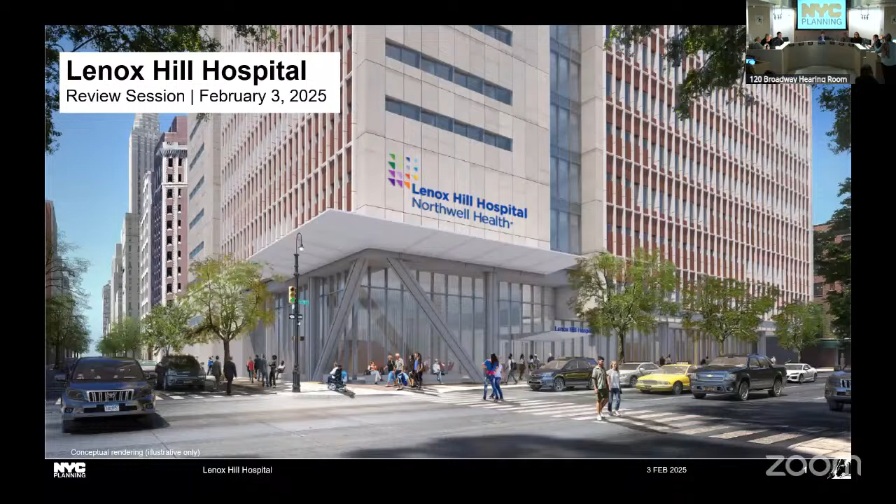This is a private application by Lenox Hill Hospital to facilitate the revitalization and enlargement of the Lenox Hill Hospital campus in its existing Upper East Side location within the full city block at 100 East 77th Street in the Lenox Hill neighborhood of Manhattan Community District 8. The applicant is requesting a number of actions, including a zoning map amendment, zoning text amendment, a special permit, and an authorization.

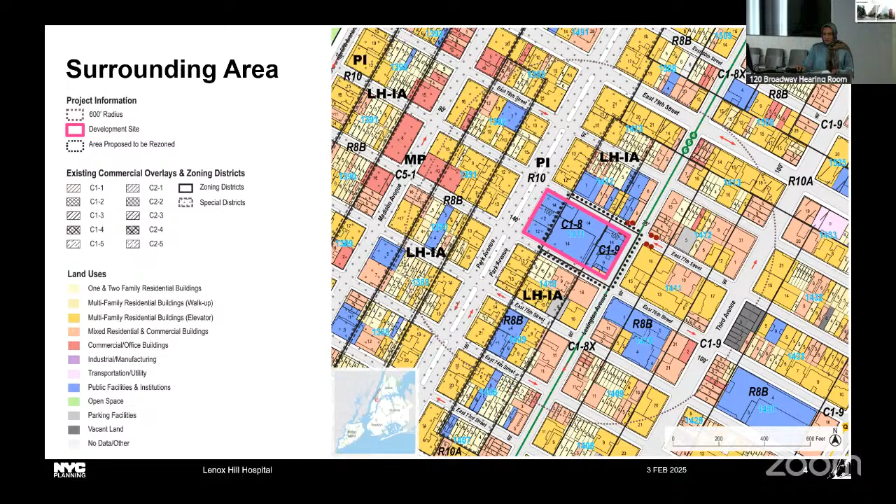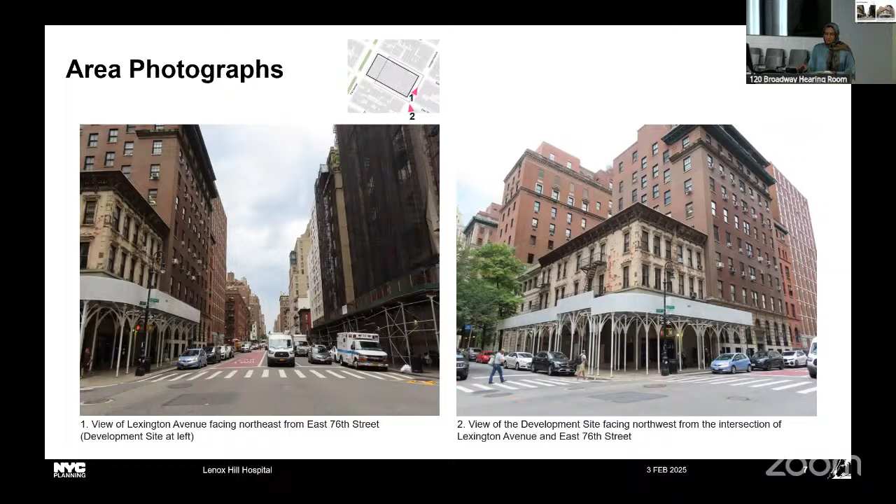The development site is an 82,700 square foot zoning lot, which encompasses the full city block. It is improved with 10 buildings used for nonprofit hospital use, which together comprise the Lenox Hill Hospital complex. The existing buildings range in height from 1 to 14 stories and were constructed between the late 1800s and early 1970s. 3 of the existing buildings were constructed pursuant to approvals by the Board of Standards and Appeals.

Together, the existing hospital contains approximately 620,500 square feet of zoning floor area, or roughly about 7.5 FAR, which is greater than the amount of floor area permitted as of right under the current zoning designations.

The existing buildings represent a variety of architectural styles and multiple eras of hospital design, and as a result, while the existing buildings have been interconnected to function as a single hospital, there are inconsistencies in elevation, and many of the buildings have long, narrow floor plates. Due to these constraints, operating suites are undersized, emergency services are limited, and most patient beds are provided in multi-bedded rooms.

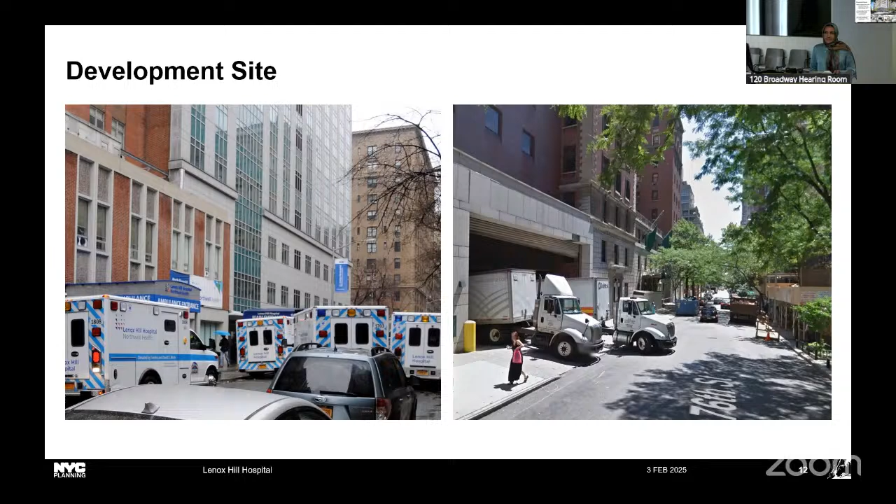To address these challenges, the applicant is proposing an enlargement and modernization of the existing Lenox Hill Hospital complex to ensure continued delivery of patient care in the hospital's Upper East Side location.

Following the renovation, Lenox Hill Hospital will provide 475 single-bedded patient rooms, state-of-the-art operating rooms, a new emergency department, and a dedicated mother-baby wing. The applicant proposes to alleviate existing streetscape impacts caused by on-street ambulance parking and inadequate loading berths by providing new on-site ambulance space and appropriately sized loading berths.

The proposed development would include improvements to accessibility at the 77th Street station, which include at-grade sidewalk expansion and additional covered open area at the intersection of Lexington Avenue and East 77th Street.

To accomplish this, the proposed development includes 2 components. On the eastern portion of the block, including the mid-block on East 76th Street, the existing buildings would be demolished to allow for construction of the new hospital building with efficient floor plates, an expanded emergency department, and industry-standard surgical suites and patient rooms. On the western portion of the block, the existing buildings would be renovated to seamlessly connect with the new building and meet modern hospital standards, including single-bedded patient rooms.

By retaining these buildings, exterior construction within the western portion of the block would be minimized, and the hospital would be able to provide uninterrupted care throughout the duration of construction.

The total floor area within the proposed development, comprising the new hospital building and renovated existing buildings, would be over 1,034,000 square feet, or 12.5 FAR. The proposed use is non-profit hospital with up to 2,500 square feet of ground floor retail for a pharmacy.

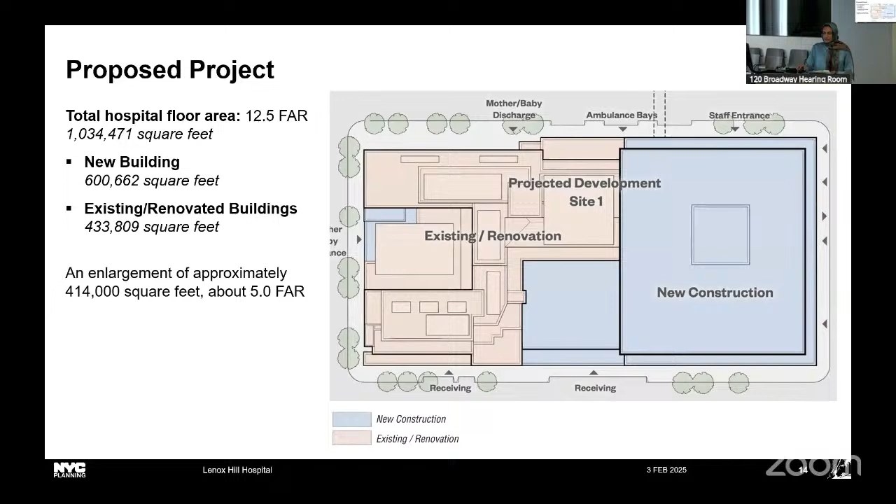Let's now take a look at the ground floor plan to better understand how the proposed development sits within the block.

On Park Avenue, a new entrance to the hospital's mother-baby wing would be provided, along with the introduction of transparency on this frontage. In addition to the mother-baby wing, the renovated buildings on the western portion would contain hospital support spaces, upgraded patient rooms, and a new fire stair.

On East 77th Street, the new hospital building would include a dedicated staff entrance west of the subway station, and further west, an approximately 148-foot wide bay that would provide a covered off-street area for up to 6 ambulances. The ambulance bay would be accessible via 3 30-foot wide curb cuts on this street.

The proposed ambulance bay would address the current concern of ambulances parking on the street. The ambulances would be able to fully pull into the bay to ensure patient loading and unloading occurred within the weather-protected hospital building.

On East 76th Street, the existing loading berths on the existing buildings are proposed to remain. In addition, a new loading area will be provided within the new hospital building with 4 berth sides to accommodate trucks fully within the hospital. This would address the current condition of larger delivery trucks impeding pedestrian and vehicular circulation on the street.

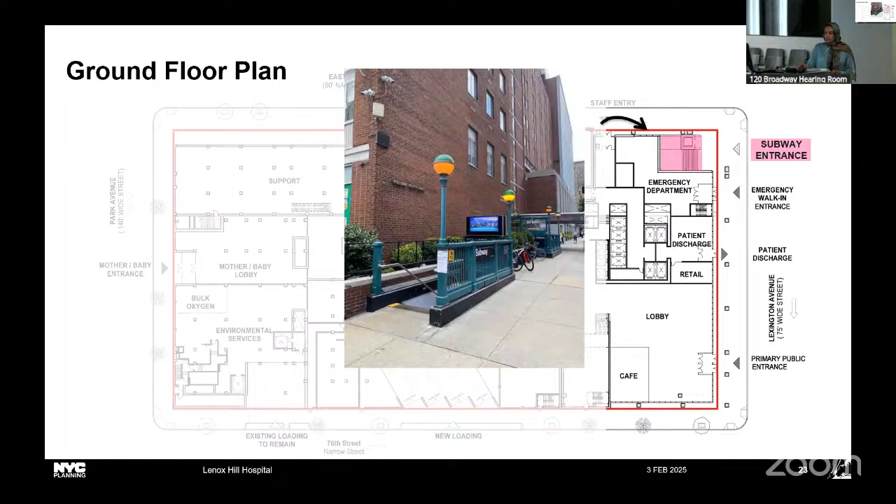This is an illustrative rendering of the proposed subway entrance. The new stair will be protected from the elements by overhanging portions of the new hospital building and include improved lighting and security systems.

This is an illustrated rendering of the ground floor along Lexington Avenue, showing the public entrance and lobby, the emergency department entrance, and the subway entrance.

Above the ground floor, the new hospital building would include a podium portion rising to a height of approximately 195 feet at the street lines of Lexington Avenue, which would include the expanded emergency department, 30 industry standard operating rooms, single-bedded patient rooms, and support spaces.

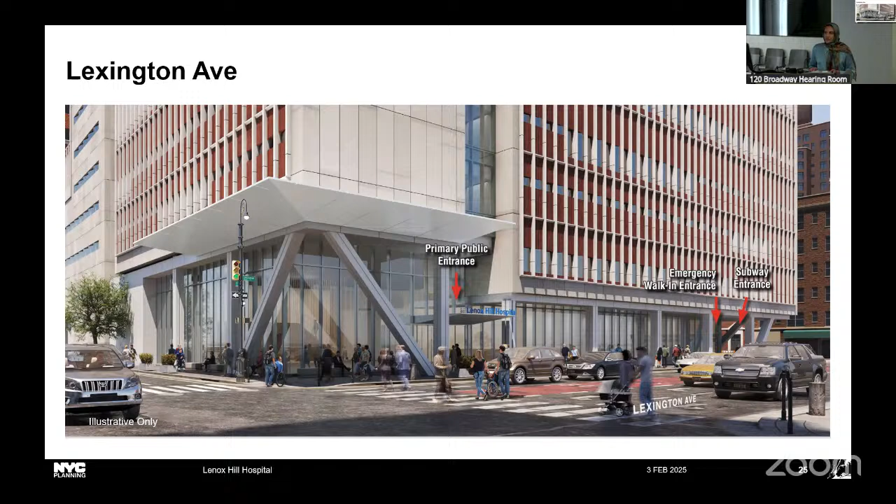Above the podium, two building envelopes are proposed in this application, identified as Envelope 1 and Envelope 2. The purpose of the two envelopes is to incorporate maximum flexibility for building design while providing two options for public review that could fit the required hospital program.

Under Envelope 1, the base of the new building along Lexington Avenue could rise to a height of 195 feet before setting back 10 feet and rising to a maximum height of 436 feet, inclusive of screened mechanical bulkheads. This portion of the new hospital building would contain 8 floors of patient rooms and several mechanical floors, while allowing for an efficient configuration of patient rooms with natural light provided along all sides of the building.

Under Envelope 1, the portion of the new hospital building at the mid-block could rise to a height of up to 210 feet, consistent with the highest floors currently existing in the mid-block portion of the development site.

Under Envelope 2, the height of the new hospital building would be lower than Envelope 1 by 41 feet along the Lexington Avenue frontage. To accommodate the hospital's programmatic needs with a reduced overall height, Envelope 2 moves some of that floor area to the mid-block instead. The envelope height along Lexington Avenue would be up to 395 feet, inclusive of mechanical bulkheads.

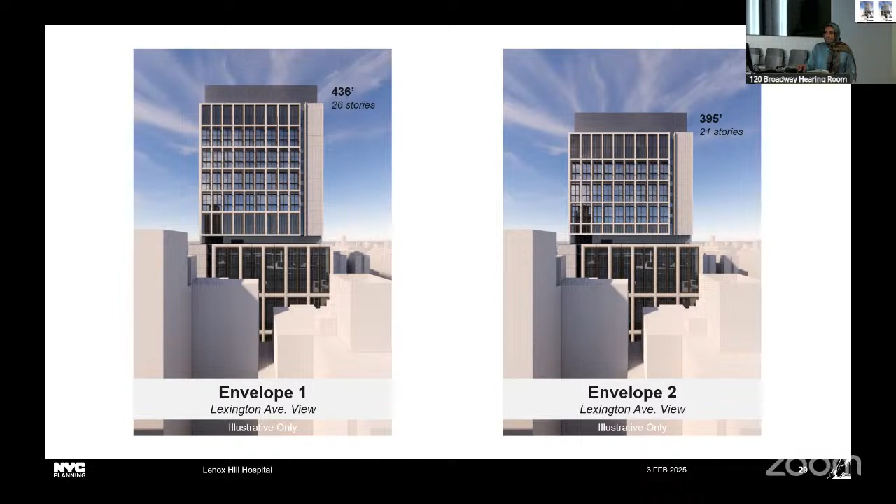This is a diagram of the neighborhood character along Lexington Avenue, with the two envelopes showing the new hospital building in dark gray.

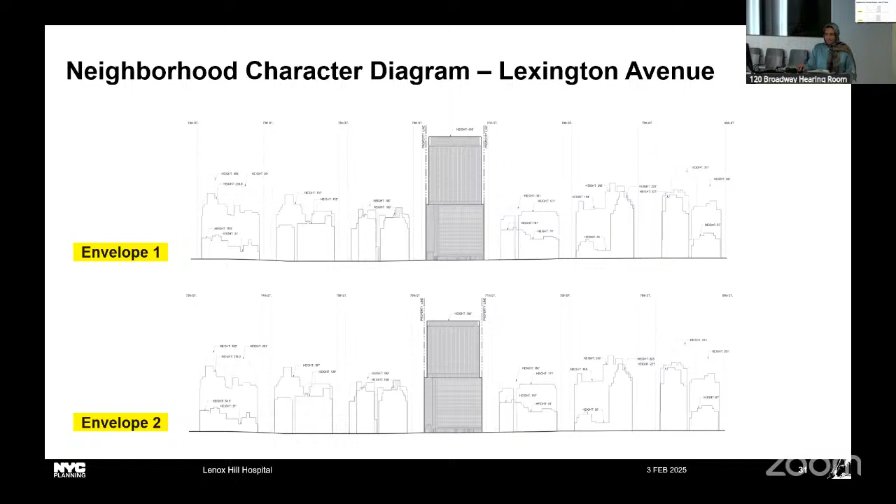The applicant is requesting a number of actions to facilitate this development. I will go into detail on each of these actions in the following slides.

The first action is a zoning map amendment to rezone the mid-block from R8B to C1-8, which is an R9 equivalent, and the portion of the mid-block within 100 feet of Lexington Avenue from C1-8X to C1-9, which is an R10 equivalent. The rezoning would allow up to 10 FAR community facility use across the entire zoning lot.

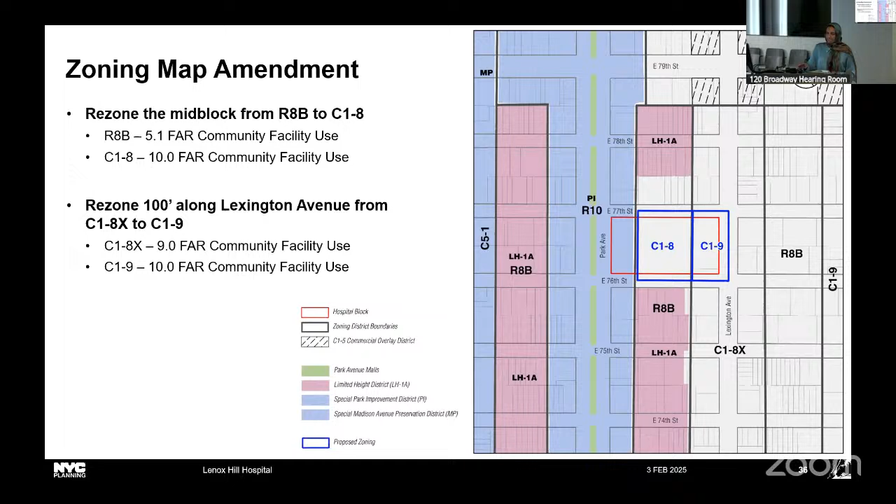The second requested action is a zoning text amendment. The first amendment is to Article 7, Chapter 4, to create a new hospital special permit that would allow up to a 20% increase in floor area for nonprofit hospitals within a full block located in an R10 or R9 equivalent commercial districts, partially within the Special Park Improvement District.

The second amendment is to ZR Section 66-513 to allow the new hospital special permit to be used in conjunction with a transit improvement bonus. The third amendment would be to ZR Section 92-21 to allow the permitted FAR on a zoning lot partially within the Special Park Improvement District for which a hospital special permit is being granted to exceed 10 FAR, provided that the amount of floor area within the Special Park Improvement District does not exceed 10 FAR.

And lastly, an amendment to ZR Appendix F would map MIH options 1 and 2 over the rezoning area.

The applicant is requesting the newly proposed hospital special permit pursuant to ZR Section 74-904 to allow a 20% floor area bonus to increase the allowed FAR on the site to 12 FAR. The special permit would also allow the project to incorporate any transit bonus separately requested through an authorization. It would establish the maximum zoning envelope and allow height and bulk modifications.

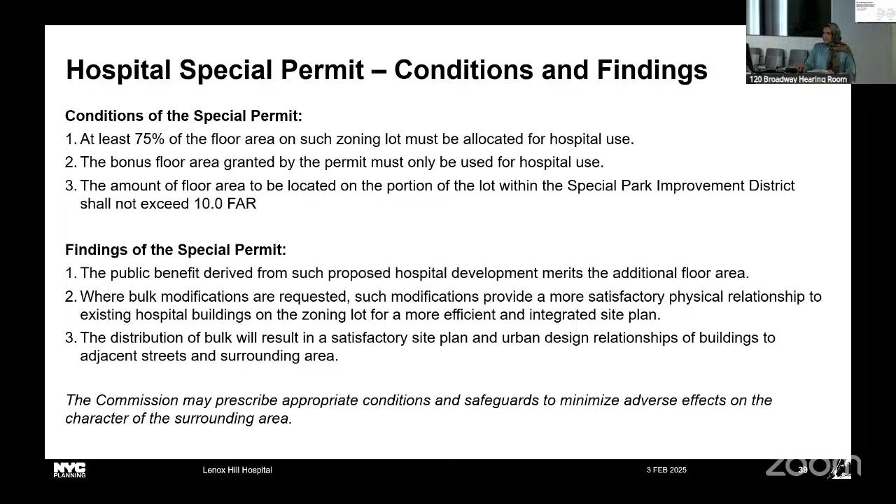As part of the requested hospital special permit, the applicant is requesting bulk modifications within the two proposed zoning envelopes. There are two types of waivers being requested: ones that enable the new building along Lexington Avenue and ones that enable the existing buildings to remain. The requested waivers to facilitate the new building on Lexington Avenue and portions of the existing buildings on the mid-block include maximum front wall height, minimum required setback, and sky exposure plane.

The requested waiver for front wall height would allow the podium height along Lexington Avenue and portions of the side streets to rise to 195 feet where 85 feet is required. The blue areas on the diagrams on this slide show the parts of the proposed buildings that exceed the maximum front wall height in the two proposed envelopes.

The requested waiver for setback would allow setbacks between 9.4 feet to 10 feet along Lexington, where 15 feet is required, and portions of the side streets where 20 feet is required. The requested waiver for sky exposure plane would enable a maximum building height of 436 feet under envelope 1 and 395 feet under envelope 2. Again, the blue areas on these diagrams show the parts of the building that exceed the height and setback regulations in the two proposed envelopes.

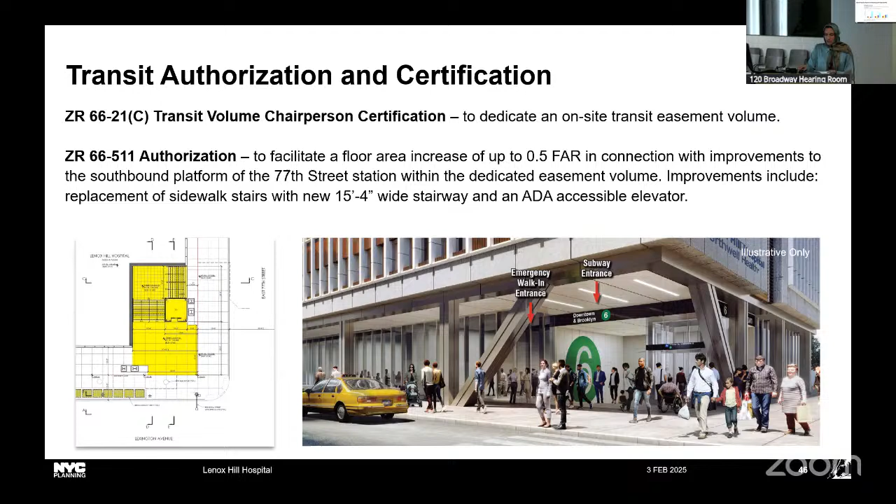This application requires a racial equity report, which helps put the proposal into context with neighborhood level socioeconomic data. There is no housing proposed as part of this application.

The Displacement Risk Index estimates comparative levels of residential displacement risk for New York City's neighborhoods. The index ranks neighborhoods from lowest to highest risk based on recent population characteristics, housing conditions, and market pressures. On this index, Lenox Hill Roosevelt Island falls in the lowest displacement risk index category.

The population of the Upper East Side is 74% white non-Hispanic, 11% Asian, 8% Hispanic Latino, and 3% Black non-Hispanic. From 2010 to 2020, the area saw a 6% increase in population, with an increase in both the Asian and Hispanic populations, a decrease in the Black population, and a small decrease in the white population.

Notice of completion of a draft environmental impact statement, or DEIS, was issued on January 31st, 2025. The DEIS identified significant adverse impacts with respect to shadows and construction noise. Mitigation measures were identified in the DEIS and will be further explored in the FEIS.

In summary, the applicant is seeking a number of actions to facilitate the expansion and renovation of Lenox Hill Hospital with an updated emergency department, single-bedded patient rooms, and industry-standard operating suites. The proposal would also alleviate existing streetscape impacts caused by on-street ambulance parking and inadequate loading berths serving the current hospital. The requested actions will allow for demolition of significant portions of the existing outdated buildings on the eastern portion of the development site, which will be replaced with a new hospital building fronting on Lexington Avenue, as well as the renovation and reconfiguration of the existing buildings on the western portion of the block to support ongoing hospital operations. The proposed development would also include improvements to accessibility at the 77th Street station.

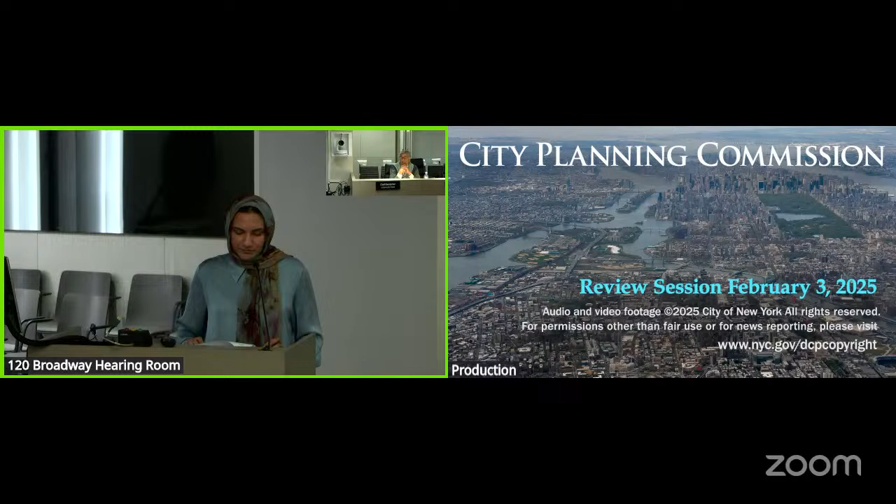Okay. If you would let them know that I'd like to know more about what is the guarantee that these things actually get done, and that they get done timely.

There's also an agreement they have to sign as part of granting the special permit that plays with the MTA, and there's a restrictive declaration that controls a lot of these different aspects. I'd be interested in what that restrictive declaration looks like. If we have it now, I'd love a copy, and I'd like to know whether it's just between the applicant and the MTA, or the applicant and City Planning. Is it our restrictive declaration? I can get more details and try to do that.

Okay, thank you. Thanks, Commissioner. Commissioner Mann? Thanks, Chair. I just want to go back to the ground floor plan, if we could, just to spend a little more time on the traffic and circulation questions the Chair was raising. Sure, do you mind pulling that up?

Can we get the presentation up? It's much more interesting to look at than me. Yeah, so if we can just maybe flip back to the ground floor.

Great. Just to understand how the proposal impacts traffic and pedestrian circulation, given the ambulance bays and new loading dock, do you know if the applicant studied a below-grade solution that was in and out, meaning in one street, out the other, rather than a turnaround scheme for the loading and ambulance bays? We're exploring different options for the ambulance itself and trying to see if there's a way to have the ambulances pull in and pull out, whether it's from the same street or the other street.

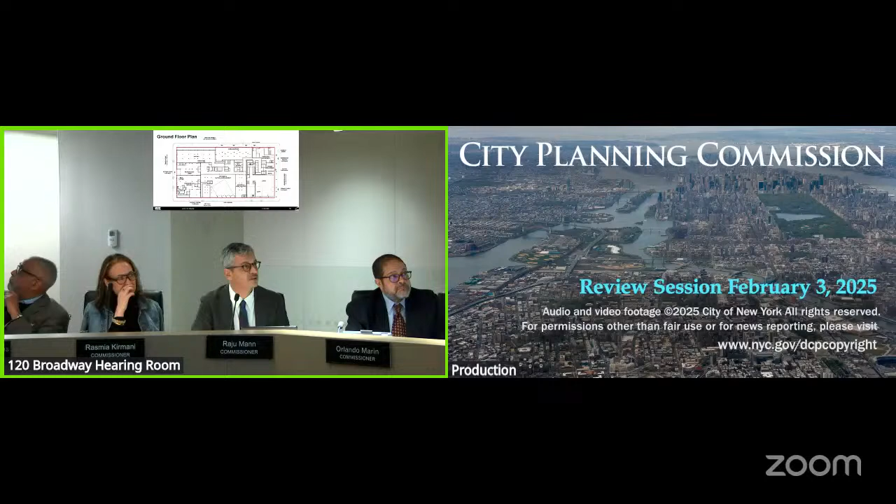Okay, it's probably in the plans, but do you know what that dimension is? Just the dimension between the column line there and the red line? I don't have the exact dimension, but I can get that to you. It seems like it's a bit of a missed opportunity not to pull the whole building back and create a more generous sidewalk along Lexington, but I can see why their site plan is constrained.

Okay, and then just on the urban design questions, which seem pretty central to this whole conversation of building height and scale and where the density goes and how much density is appropriate—do you all have a simple section across Lexington, or reference points to help us think through, not just here in the East 70s, but along the East Side?

And apologies, I was late, so I missed this.

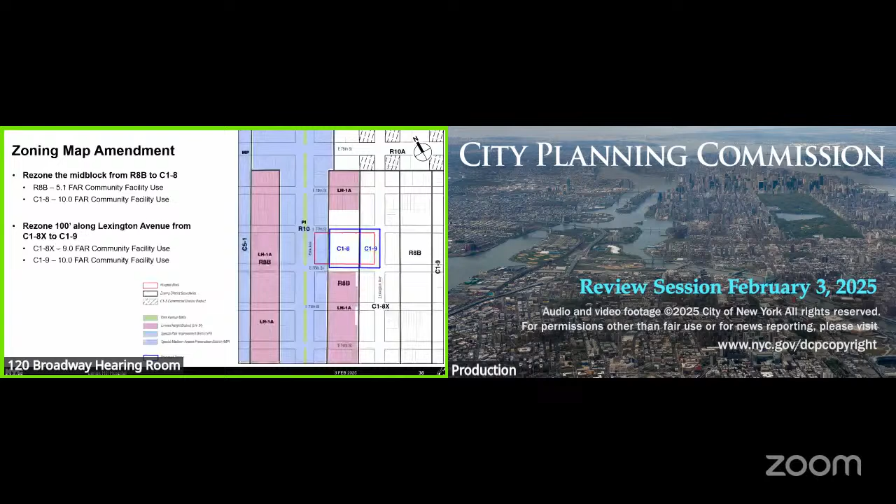I'm just curious if the department is thinking about any particular reference points for thinking about the bulk along Lexington in terms of similar buildings. Well, we have the neighborhood character analysis that outlines sections across from the side streets as well as the avenues, to help you contextualize what the proposed development would look like within this area.

So maybe the simple question, which I can probably look up, is how far south do you have to go to get to this level of bulk on Lexington Avenue? Meaning, what's the nearest reference point for a building with a street wall this height and a building at 400 feet? I can get that information for you. And I can probably look that up too.

Okay, so that's the loading and traffic questions, and then just the urban design questions. I think I had one other.

Oh yeah, on the hotel special permit. I want to make sure I understand the applicability of that. Is that a citywide special permit then?

It's pretty limited in terms of where it would be applicable, because it has to be for lots that have both an R9 equivalent commercial district and an R10 equivalent commercial district within the special Park Improvement District. So it's really just CB8, and within CB8, the eligible sites are very limited, this being sort of the only one currently.

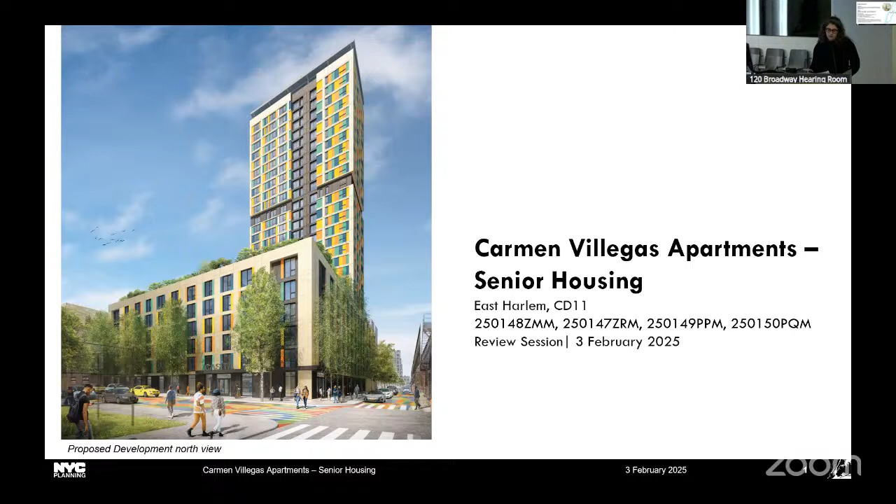This is an application by HPD and its partners for four actions: a zoning map amendment to change the existing R72, R72/C24, and R7B/C24 districts to R91 and R91/C24 districts; a zoning text amendment to modify Appendix F to designate an MIH area; an acquisition of the property by the city; and a disposition of non-residential city-owned property.

Approval of these actions would facilitate the development of a 28-story income-restricted housing building with 210 units, including 147 AIRS units, plus 1 superintendent's unit, and ground floor community facility space for seniors in East Harlem, Manhattan Community District 11.

The surrounding area is characterized by a range of low to high-rise buildings consisting mostly of multifamily walk-ups and elevator buildings, as well as a number of NYCHA campuses. Institutional uses include income-restricted housing and housing for vulnerable populations, as well as charter and public schools.

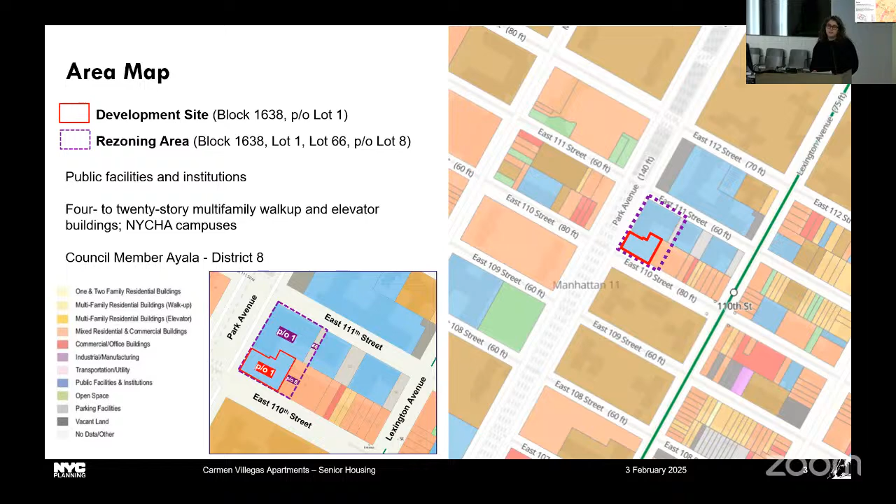The surrounding area comprises a range of high-density R districts. There's one C8-4 district just south of the project area, while C4 overlays, which permit typical neighborhood retail uses, predominate on the avenues. The surrounding area includes the Special East Harlem Corridors District and Special Park Improvement District, and is covered by the Transit, Fresh, and Coastal zones.

The rezoning area is currently zoned R72/C24, where residential FARs range from 3.44 to 5.01, and it's also zoned R7B/C24, where residential FARs range from 3 to 3.9.

The surrounding area includes many high-rise NYCHA developments, and northwest of the project area is Sendero Verde, an income-restricted HPD housing development, which was completed in 2022. A major delineating feature of the surrounding area is the Park Avenue Viaduct, which supports the Metro North rail lines.

Zooming into the proposed development site, today privately owned Lot 1 is home to Casita Park, which is a 94-unit residence for seniors. The lot was previously city-owned, and in 2000, HPD received approvals that facilitated the construction of Casita Park, plus 12 required accessory off-street parking spaces.

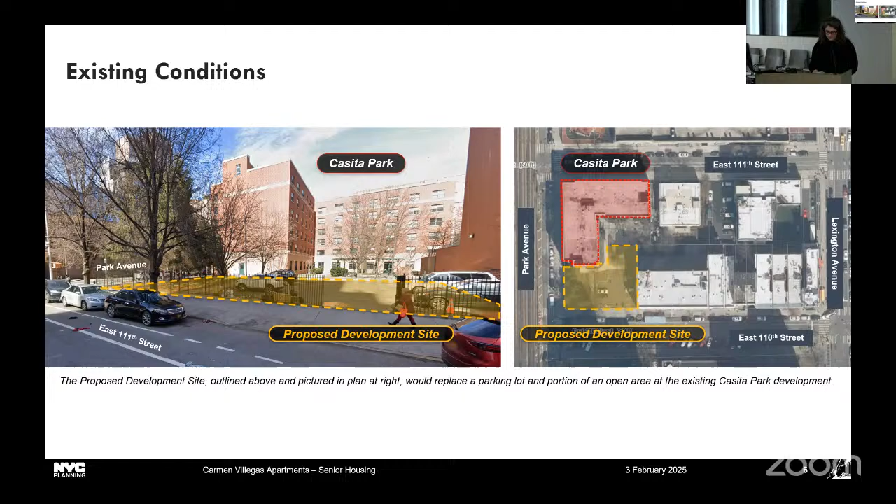Here's a view of the development site on East 110th Street facing southeast from Park Avenue, with the development site at the left. A view of the development site facing east from the intersection of Park Avenue and East 110th Street, and a view of Park Avenue and the Park Avenue Viaduct facing northeast from East 110th Street, with a corner of the development site pictured in the rightmost area of the image.

Here's another view of the sidewalk along the east side of Park Avenue, facing northeast from East 110th Street, with the development site at right. A view of the intersection of Park Avenue and East 110th Street, facing west, immediately across the street from the development site. And a view of the sidewalk along the north side of East 110th Street, facing southeast from Park Avenue, with the development site at the left.

Circling around the block to East 111th Street, there are three views of Casita Park pictured here, and only the tower of the proposed development would be viewable from this vantage point.

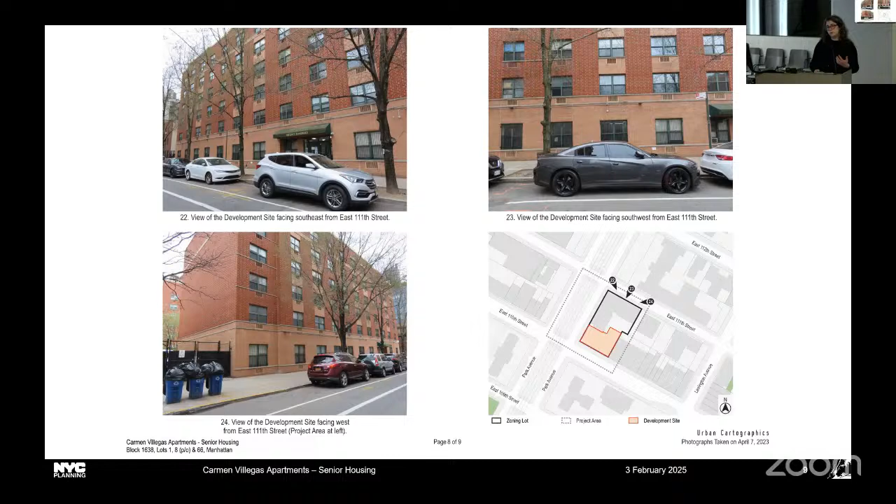The proposed development would rise to a height of 291 feet and span 28 stories, comprised of 139,000 zoning square feet, and include 63 MIH income-restricted units and 147 income-restricted units developed under the AIRS program. The building itself would have an FAR of 5.42.

The overall FAR for zoning lot 1, including Casita Park and the proposed development, would be 8.22. Finally, there is proposed to be 7,000 square feet of community facility space, proposed to be rented to SAGE, which is an advocacy organization for LGBT seniors.

Two outdoor amenity spaces in the proposed development include a 6th floor terrace and ground floor open areas. The ground floor facing south on East 110th Street provides entrances for the residential and community facility uses, and adjacent to the building's residential lobby to the east, the proposed development includes open space consisting of an arcade, which would be named Salsa Way, that connects to an open interior courtyard. This space would be open to building residents of both the proposed development and of Casita Park.

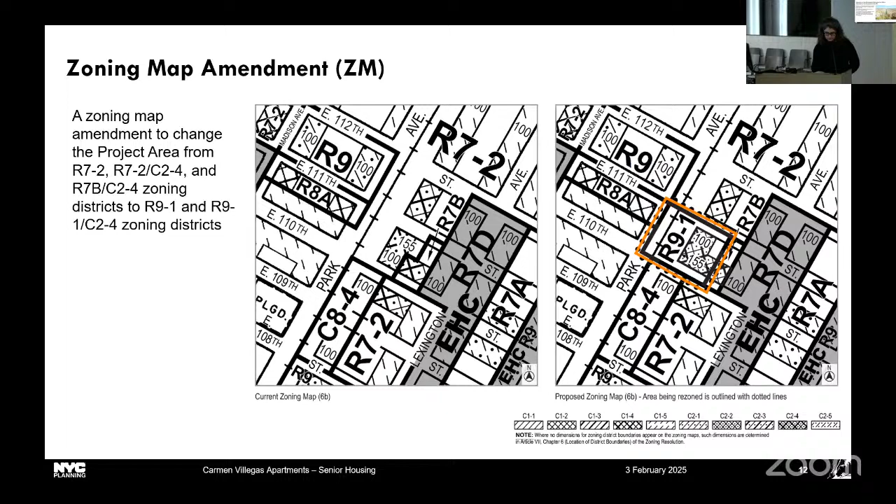This application requires a racial equity report, which includes the following findings. As of 2021, half of the neighborhood households in East Harlem earn less than $36,000 a year, a median income that is significantly lower than Manhattan and citywide median incomes.

In this proposed development, there will be a mix of studios and 1-bedrooms up to 60% AMI. However, the applicant has conveyed that these details aren't final and will speak more about them during the ULURP process. Overall, as you can see on the map, the neighborhood is at a higher displacement risk.

As of 2020, almost half of East Harlem residents identify as Latino and over a quarter identify as Black, which is in contrast to Manhattan as a whole, where almost half of residents identify as white.

From 2010 to 2020, East Harlem's population increased at a slower rate than the city's population. The number of Asian and white identifying residents increased by almost 50% and almost a third, respectively, while the number of Black and Hispanic residents decreased by 6% and 5%, respectively.

There's been a 13% jump in housing units constructed from 2010 to 2023, while population has increased by 4% in the area. This is a higher rate of housing production than the borough and the city as a whole, so the neighborhood's population is growing at a comparatively slower rate.

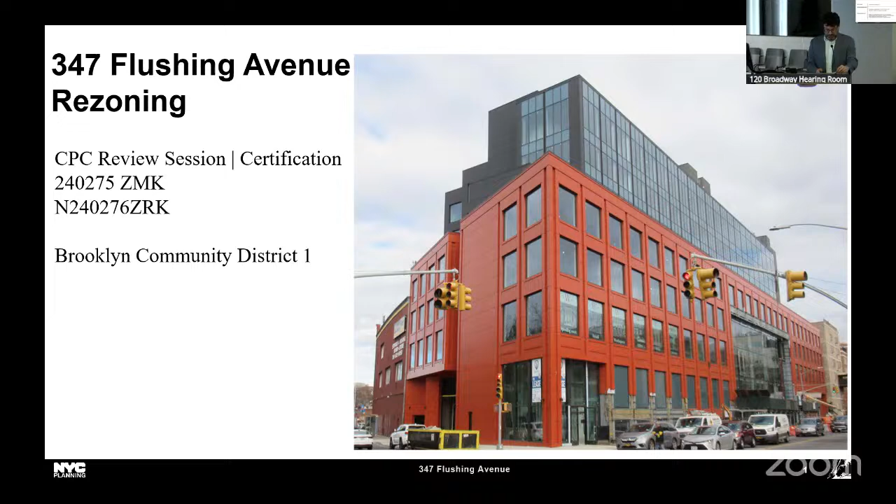This is a private application by Flushing Condo Holdings, LLC, for a zoning map amendment from M1-2 to M1-5 and R7-1/C2-4, and a zoning text amendment to map an MIH area in order to facilitate the conversion of 313 parking spaces, about 82,000 square feet of community facility space, and about 58,000 square feet of commercial space into 84 parking spaces, about 26,000 square feet of community facility space, and about 137,500 square feet of commercial space.

This conversion would take place within an existing 8-story building that was constructed in 2022. The proposed actions would also bring a legal but non-conforming 30-unit residential building at the corner of Kent Avenue and Flushing Avenue into compliance. This building was authorized in 2004 by BSA variance.

The project area is located in the southwestern portion of Williamsburg in Brooklyn Community District 1, near the boundaries of Community Districts 2 and 3 and the Brooklyn Navy Yard. The project area is bounded by Flushing Avenue, Kent Avenue, Classon Avenue, and Wallabout Street.

Here's an aerial view of the project area looking northwest. The project area sits at the border of Williamsburg, Clinton Hill, and Bedford-Stuyvesant, one block east of the Brooklyn-Queens Expressway, across which are the Brooklyn Navy Yard and Naval Cemetery landscape, a local open space. Williamsburg Bridge Plaza is about 4,000 feet north as the crow flies, and Pratt Institute is about half a mile southwest.

8 blocks east of the project area is the Flushing Avenue station on the G train, and the B48, B57, and B62 buses are all accessible within a couple blocks. The Brooklyn-Queens Expressway, an interstate highway, is the only freight truck route in Brooklyn and ultimately connects New Jersey to the Bronx, passing through Staten Island, Brooklyn, and Queens. Flushing Avenue is also a truck route connecting downtown Brooklyn with Maspeth, Queens, and the Long Island Expressway.

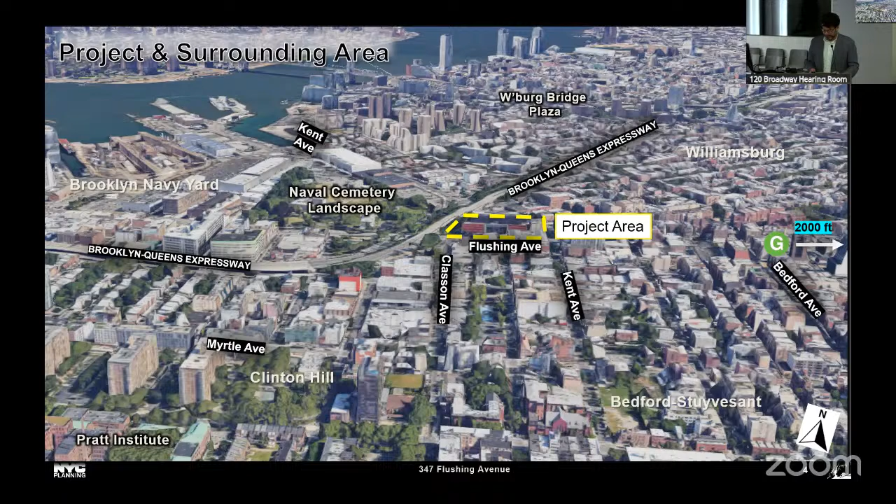Here is a view from the bird's eye perspective of the project area. You can see the BQE immediately to the west and the Naval Cemetery landscape beyond that. Beyond that is the Brooklyn Navy Yard.

Here is an axonometric view of the project area looking west. As you can see, the commercial and community facility 8-story building has already been constructed and acts as a buffer between the Brooklyn-Queens Expressway and Navy Yard to the west and various residential uses to the east. You can also see on the eastern side of the area outlined in the yellow dashed line, the project area, the existing 30-unit residential facility that was authorized by BSA variance in 2004, about 6 stories high.

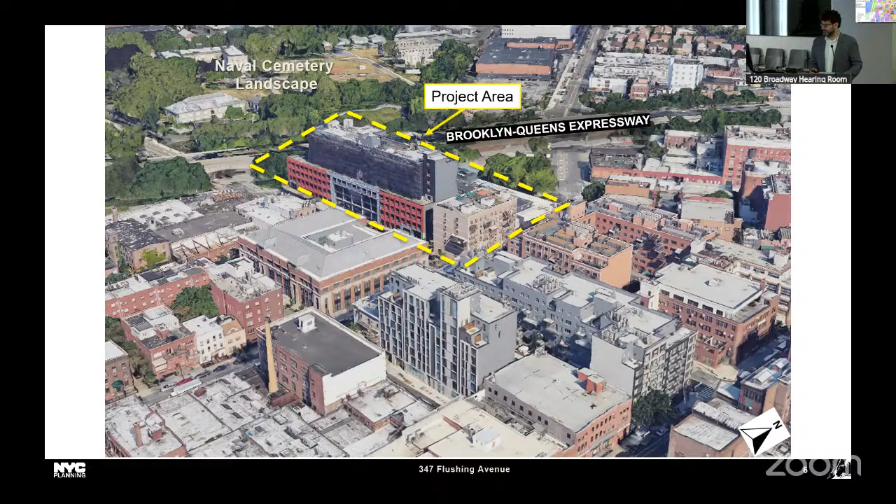The project area consists of Block 2260, Lot 35 and 7501, bordered by Wallabout Street to the north, Flushing Avenue to the south, Classon Avenue to the west, and Kent Avenue to the east.

The site is currently zoned M1-2, a manufacturing district which permits commercial, light industrial, and certain community facility uses, including retail, woodworking, repair shops, and wholesale storage facilities. The maximum permitted FAR is 2.0 for industrial and commercial uses, and 4.8 for community facility uses. Required off-street parking varies by use, but typically 1 space per 300 square feet for commercial and 1 space per 1,000 square feet for industrial.

Land uses in the surrounding area consist of a mix of light industrial, residential, mixed commercial and residential, and community facility uses. Much of the existing multifamily housing in the area is located within an M1-2 or other manufacturing zoning district, making it legal but non-conforming. In particular, immediately east of 347 Flushing on the same block is a 30-unit residential development authorized by BSA variance in 2004. The applicant is requesting to rezone this lot to R7-1 with a C2-4 overlay to bring it into conformance and map MIH to ensure affordability at any future residential developments on this site.

I also want to draw the Commission's attention to 2 rezonings that occurred in the vicinity of the project area.

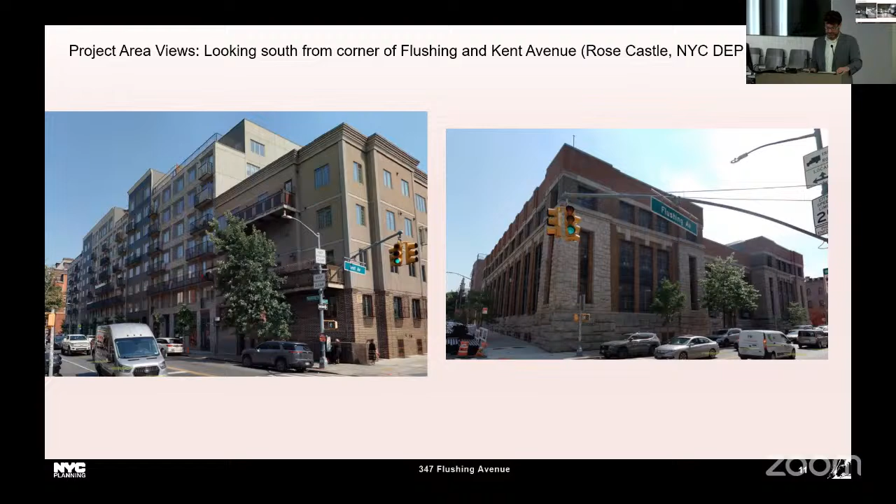I would like to draw the Commission's attention now to some discrepancies in the interior of the building that were discovered during the application process and are being addressed by DCP, the applicant team, and the Department of Buildings. According to materials filed with the Department of Buildings in 2022, when this building first opened, the current building includes 2.0 FAR of commercial uses and 2.8 FAR of community facility uses, namely the outpatient healthcare facility.

During the application process, the applicant noted this discrepancy to DCP and also noted that the rezoning being requested today, by mapping a district with up to 5.0 FAR commercial and 6.5 FAR community facility, would bring the existing building into compliance. Our office alerted the Department of Buildings to the discrepancy, and our teams are working together with the applicant team to resolve the issue and move forward.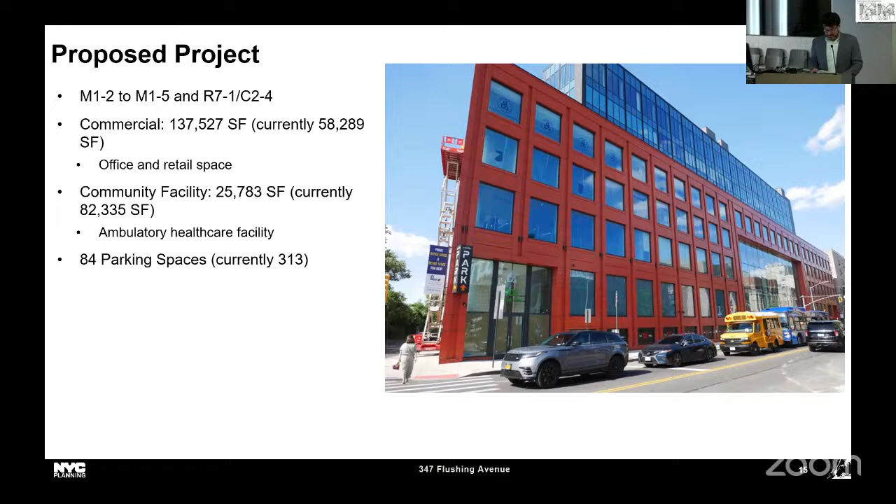To facilitate the proposed development, the applicant seeks a zoning map amendment and a zoning text amendment to map an MIH area. The M1-5 zoning district would be mapped beginning at the northeast corner of Classon Avenue and Flushing Avenue to a depth of 100 feet, and along the northern frontage of Flushing Avenue to a line 90 feet west of Kent Avenue. The R7-1/C2-4 district would be mapped from the northwest corner of Kent Avenue and Flushing Avenue to a depth of 100 feet, and then east along the remainder of the block.

M1-5 districts permit a maximum FAR of 5.0 for commercial and manufacturing uses and 6.5 for limited community facility uses, with no required off-street parking. Height is governed by a sky exposure plane.

R7-1 districts are medium-density residential districts permitting a maximum FAR of 3.44, or up to 5 with MIH on narrow streets. For buildings on a narrow street, the maximum base is 65 feet with a maximum building height of 75 feet, or in areas where MIH is mapped, a base height of 85 feet and a maximum of 105 feet. No parking would be required for buildings in the inner transit zone, which includes all of Brooklyn Community District 1.

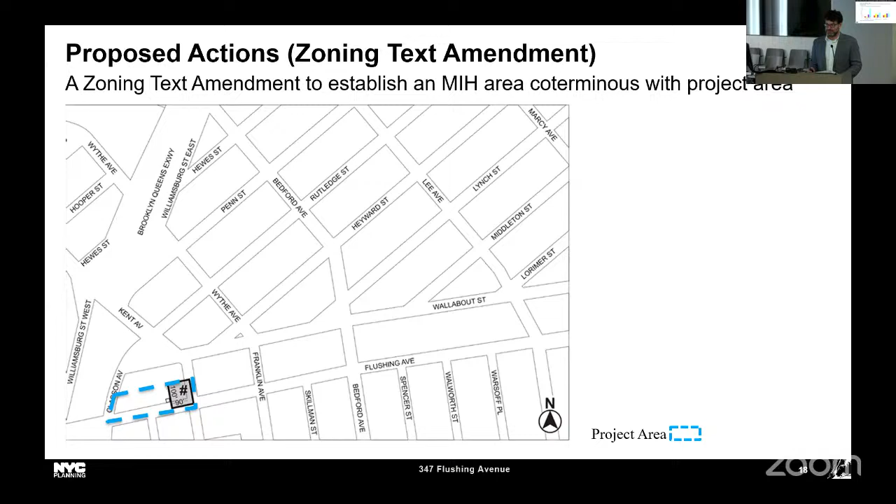This application requires a racial equity report because it is seeking a change to the use regulations in a manufacturing district where a building in the project area contains at least 100,000 square feet of floor area. The project area is located in PUMA 4001, roughly coterminous with Brooklyn Community District 1.

The overall effect of the proposed project, according to the RER, would be an increase of 120 jobs compared to today. These jobs would be concentrated in the office, retail, and medical sectors.

The part of Williamsburg where the project area is located, Neighborhood Tabulation Area 72, is noteworthy for its high displacement risk, according to the Equitable Development Data Explorer. What largely drives this conclusion is the fact that 74% of residents in this neighborhood tabulation area have an income less than 200% of the federal poverty level.

To conclude, this is a private application from Flushing Condo Holdings, LLC, for a zoning map amendment from M1-2 to M1-5 and R7-1/C2-4, and a zoning text amendment to Appendix F to map MIH, to facilitate the conversion of an existing 8-story building with commercial, community facility, and parking uses to a new floor plan with more commercial floor area and less community facility and parking space than currently exists on site.

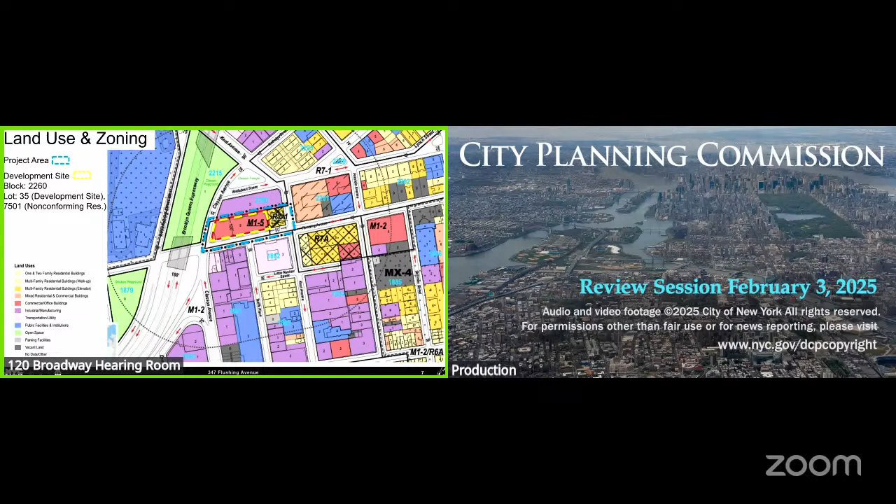So a couple of things. Thank you, that's useful. For a time we've been talking about a neighborhood-wide study that can help us understand exactly what you're talking about, like how many instances, but also what are the needs, the potential land use rationale that could support something like that. Is that something the department has made any progress on? I know there were some procurement requirements with one particular aspect of that study, but I'm very interested in understanding what is the status of that research.

Sorry, I know every time this comes up we land in the same place, but this is exactly why this would be so useful. Unfortunately, I don't have any updates on the timing of this. I feel pretty bad coming back, but as we know, we have a lot of applications in this area. As soon as we have more information on the procurement process and when we can start the study fully, we'll definitely come back and talk with you through that.

Thank you, that would be useful as we approach cases like this one. I think in this particular case the land use rationale makes sense. The only part that doesn't make sense is why it doesn't include at least some manufacturing, to respond to the district being proposed. Any additional information on this would be useful. If you can encourage the applicant to consider that, I think that would be useful. It's not unprecedented to have mixed industrial commercial that could actually work here. So I would be interested in understanding, if not, why not.

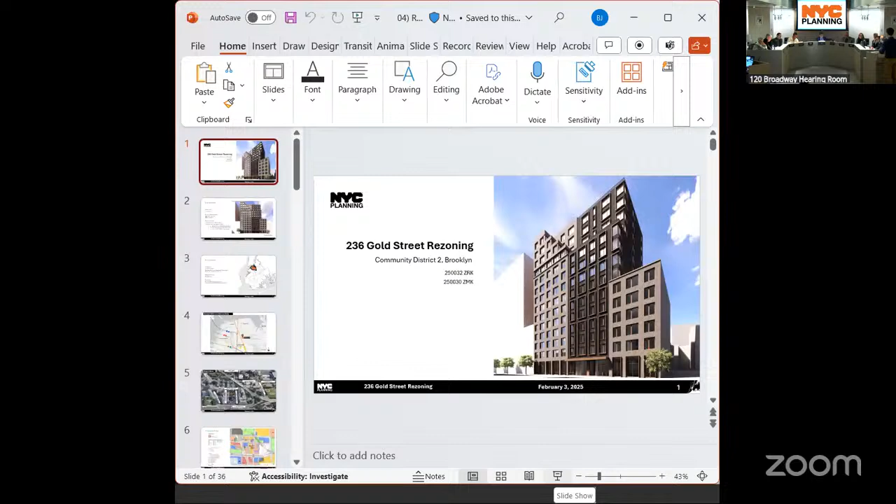Good afternoon, Chair Garodnick and Commissioners. This is a certification presentation for 236 Gold Street, a private application from 236 Gold LLC requesting a zoning map amendment from an R6B to a C6-2A district and a zoning text amendment to Appendix F to establish a mandatory inclusionary housing area with options 1 and 2. These actions would facilitate a 14-story mixed-use building with over 79,500 square feet of total floor area, with 114 dwelling units, 29 of which would be income restricted under MIH Option 1, and 2,000 square feet of ground floor commercial.

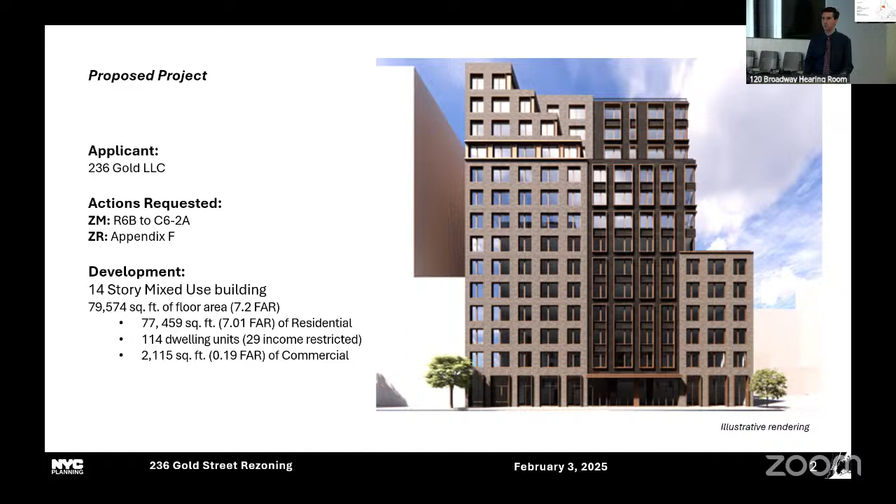This project is located at 236 Gold Street between Concord Street and Tillery Street in the Bridge Plaza neighborhood just north of downtown Brooklyn in Brooklyn Community District 2.

This project site is extremely well connected with public transportation. Within a half mile of the project area there are 5 subway stations with 10 train lines: the B, F, Q, R, A, C, 2, 3, 4, and 5 trains. By subway, the financial district is about 20 minutes away, and Midtown Manhattan is about 30 minutes away. The B57, B67, B69, and B62 bus lines also have bus stops within a 4-minute walk of the project area, connecting it to Brooklyn neighborhoods such as Gowanus and Kensington, and Queens neighborhoods such as Maspeth and Long Island City.

This is an aerial view looking north towards the project area, highlighted in orange. The project area is situated between the Brooklyn-Queens Expressway to the east, Tillery Street to the south, which is 150 feet wide, and Flatbush Avenue, 128 feet wide, to the west, which turns into the Manhattan Bridge just north of the project area. The project area fronts on Gold Street, which is 76 feet wide and consists of medium-density 12 and 13-story apartment buildings.

Concord Street to the north of the project area consists of primarily lower-density 3- and 4-story townhomes, as well as 1-story warehouses. South of the project area is the Brooklyn Commons, formerly Metrotech, with Borough Hall and downtown Brooklyn Civic Center to the west. Nearby open spaces include the 6-acre Trinity Park to the north, the Golconda Playground to the northeast, McLaughlin Park to the west, and the 10-acre Commodore Barry Park to the east. These are mostly small parks with a wide variety of sport courts used for recreation.

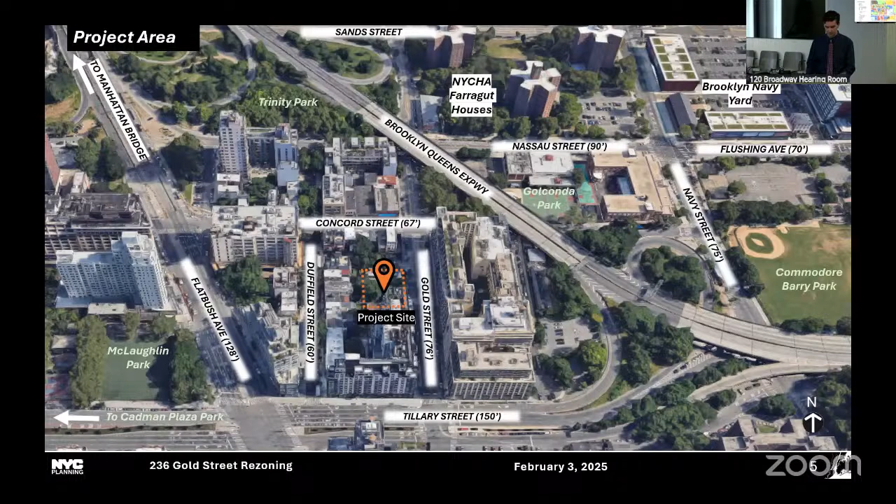The project area is immediately surrounded by an existing C6-2 district to the south and east, and an R6B district to the north and west. There's an R6 district located both north and east of the project area, and a C4-3 district located both north and west. There's an R7-1 district mapped further west of the project area as well.

The special downtown Brooklyn district sits south of the project area and was rezoned in 2004 as part of the Downtown Brooklyn Development Plan to promote the growth of downtown Brooklyn as a regional central business district.

The project area was rezoned from an M1-1 to an R6B zoning district in 2003 as part of the Bridge Plaza rezoning, which allowed for residential and commercial development in scale with existing land uses, balanced with nearby C4-3 and C6-2 districts, which allowed for slightly higher densities to support development in underdeveloped lots. The rezoning prohibited new industrial and commercial uses on existing vacant lots within the Bridge Plaza neighborhood.

This is a view looking directly at the project area from Gold Street. Lots 33, 35, 36, and 37 were previously used for parking, but currently remain vacant. You can see the lower density townhomes in the R6B district to the north, as well as the medium density residential apartment buildings directly south in the C6-2 district.

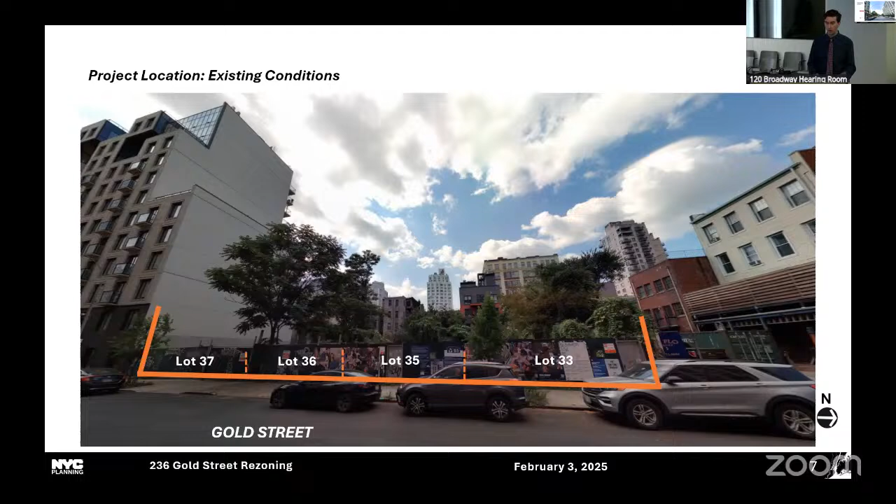This is a view looking southwest on Concord Street, looking at Gold Street. The project area is highlighted in orange on the left side of the image. There are 3- and 4-story townhomes located along Concord Street in the R6B district, as well as the window and door manufacturer directly on the corner of Gold and Concord.

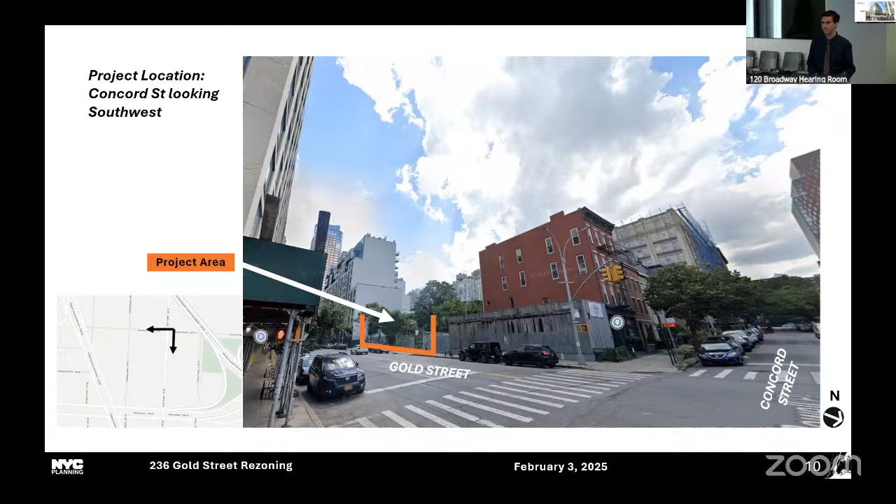The proposed development is a 14-story mixed-use building. The base of the building will be 105 feet and then will step back to a total height of 145 feet. The building will have 77,500 square feet of residential with 114 dwelling units, 29 of which will be income restricted under MIH Option 1. The ground floor will contain 2,115 square feet of commercial uses.

To facilitate the proposed development, the applicant seeks a zoning map amendment to rezone the project area from an R6B to a C6-2A district, as well as a zoning text amendment to Appendix F to map MIH with Options 1 and 2.

The zoning map amendment seeks to rezone the project area from an R6B to a C6-2A. This would extend the current C6-2 zoning on Gold Street for a more contextual mid-block. The proposed C6-2A district has a length of 125 feet, which is the entire length of tax lots 33, 35, 36, and 37 on Gold Street, which comprise the development site. The rezoning boundary is set to the center line of the block, which includes a 12-foot sliver of lots 14, 15, 16, 17, as well as 7501 on Duffield Street, which are not owned by the applicant or included in the proposed development.

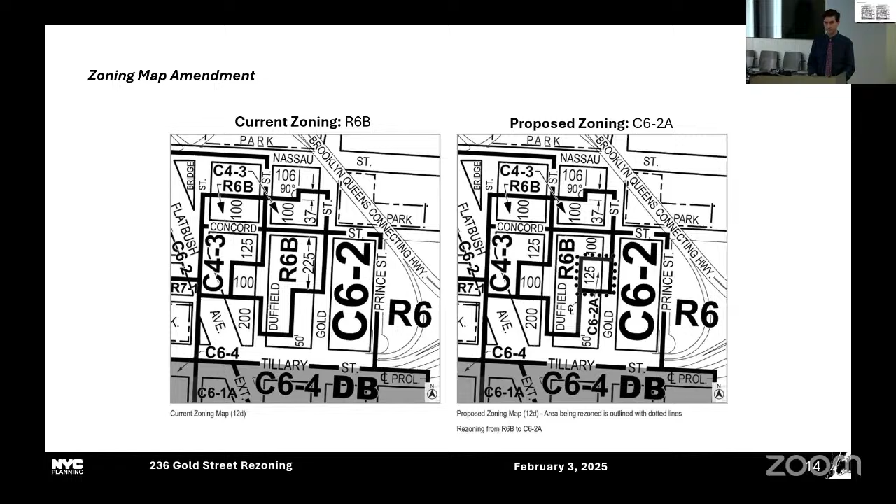C6-2A zoning districts are contextual districts where quality housing bulk regulations are mandatory for residential buildings. The residential equivalent of a C6-2A district is R8A. The FAR is 7.2 with MIH.

C6-2A districts produce high lot coverage 14-story apartment buildings set at or near the street line. The maximum base height is 105 feet, and then the building must set back before rising to a maximum height of 145 feet. No parking is required for residential developments in the inner transit zone.

The proposed zoning text amendment to Appendix F would map an MIH area with options 1 and 2 for an area coterminous with the rezoning area. Option 1 requires 25% of the residential floor area to be income restricted for households on average making 60% of the area median income or lower. Option 2 requires 30% of the residential floor area to be income restricted for households on average making 80% AMI or lower.

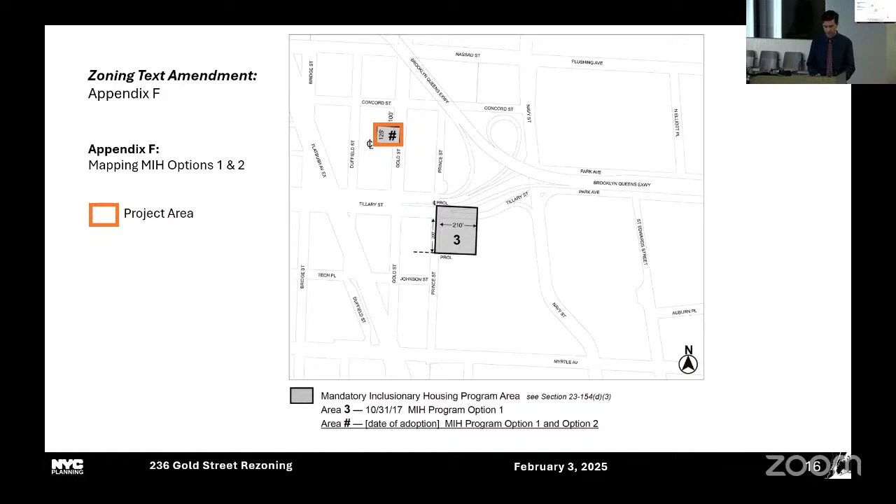This application requires a racial equity report, which helps put the proposal into context with neighborhood-level socioeconomic data. The annual median household income for this project area is about $119,000, which is significantly greater than the median household income in both Brooklyn and New York City. The applicant intends to utilize MIH option 1, which would result in 12 units for families with income averaging 40% AMI and 17 units for families with incomes averaging 60% AMI.

As per the racial equity report, the population of Brooklyn Heights and Fort Greene is 40% white non-Hispanic, 20% Black non-Hispanic, 14% Hispanic Latino, and 12% Asian non-Hispanic. The white non-Hispanic population is a significantly greater share of the area's population when compared to Brooklyn and New York City.

From 2010 to 2020, the area saw a 29% increase in population, which is significantly greater than Brooklyn's 9% increase and New York City's 8% increase. There was significant growth in the Asian and white non-Hispanic populations, outpacing Brooklyn and citywide trends. There was a 12% decline in the Black non-Hispanic population and a slight increase in the Hispanic Latino population of any race.

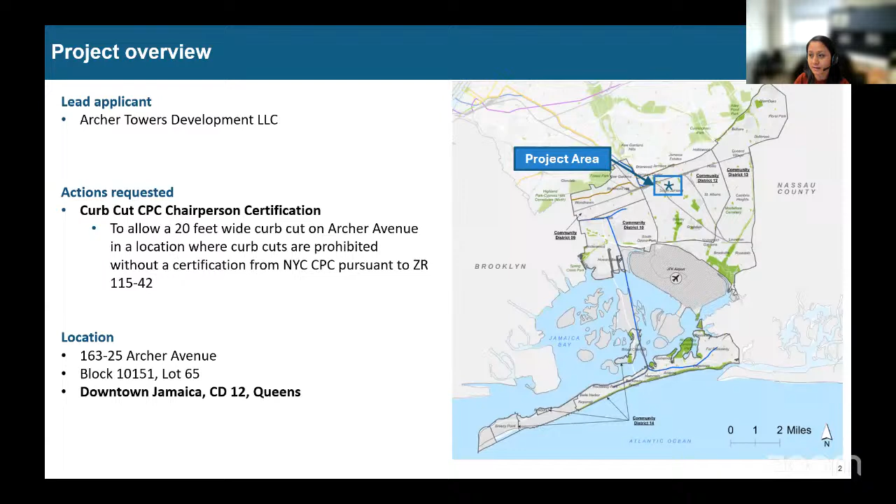The project area is located in proximity to a transit-rich destination with numerous transit resources. Jamaica Transit Hub is located approximately 0.7 miles west of the project area, servicing E, J, and Z subway lines, the air train connecting to JFK Airport, and the LIRR line. Jamaica Center Station is located 4 blocks west of the project area, also servicing E, J, and Z subway lines. The Sutphin Boulevard and Parsons Boulevard stations, which service the F train, are located approximately 0.7 miles north of the project area along Hillside Avenue. There is an MTA bus depot located 4 blocks southeast of the project area, fronting Merrick Boulevard, and Rufus King Park is located within half a mile of the project area.

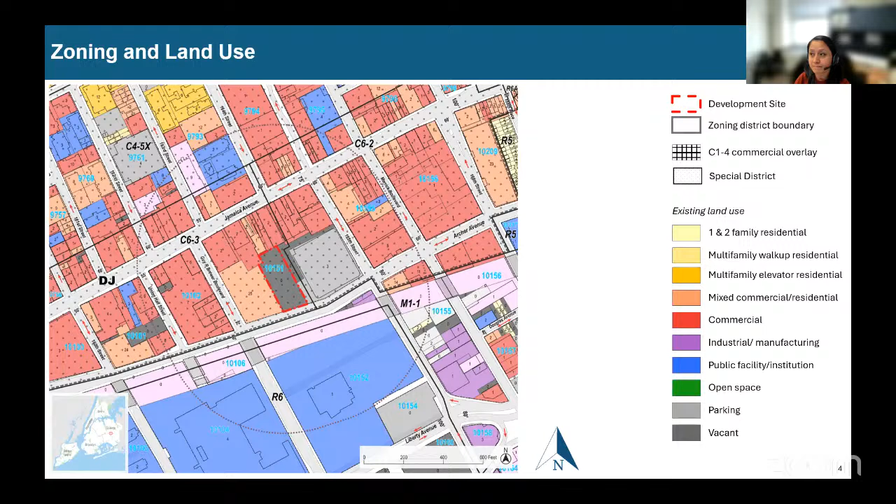The project area is located four blocks east of the Parsons Boulevard E, J and Z terminus, with frontage on Archer Avenue between Guy R. Brewer Boulevard and 165th Street. 164th Street to the east of the lot is a paper street, not in use as a public street. It is partially owned by the New York City Department of Transportation and partially privately owned, and is part of Lot 116 to the east, a portion that fronts on Archer Avenue.

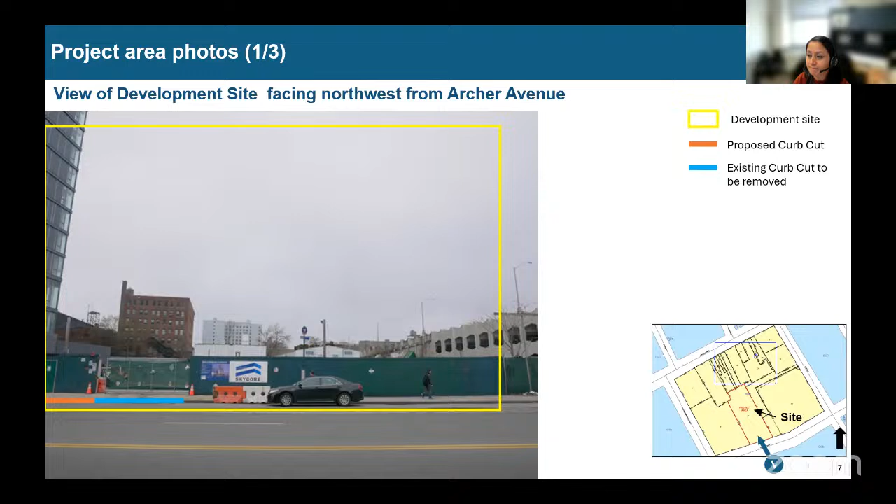Next slide, please. Oh, sorry.

This photo shows the view of the sidewalk along the north side of Archer Avenue facing east. The development site is to the left side of the screen, depicted by a yellow solid line, and to the right we can see the AirTrain track that runs east to west along Archer Avenue.

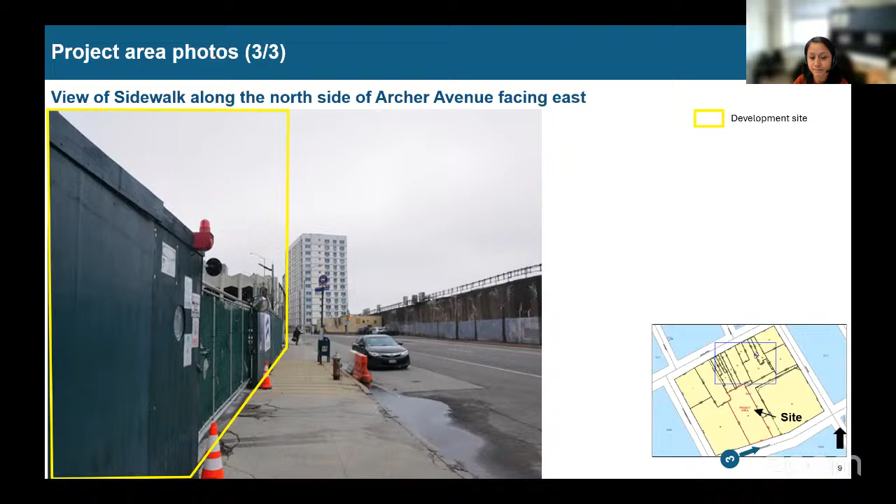The development team is proposing a 22-story mixed-use development with 259,400 square feet of residential floor area and 2,000 square feet of community facility on the ground floor level.

They are proposing 400 100% income-restricted units, of which 80 units are for households earning at or below 80% AMI. The remaining income-restricted units are for households earning above 80% AMI.

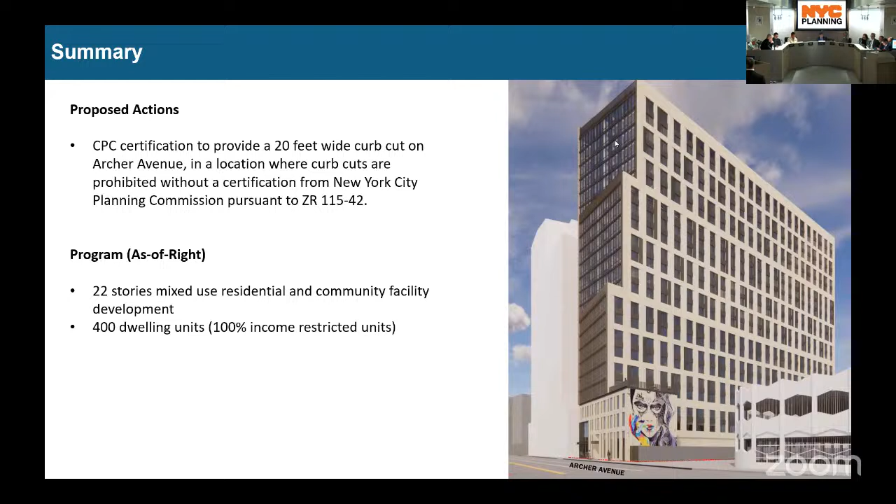Great, thank you very much. So the applicant is seeking a 20-foot curb cut. There's an existing curb cut there today, correct? That's correct. How wide is that existing curb cut? The existing curb cut is around 42 feet. And there's no other access to the site from any other street, is that right? Yes, that's correct. Okay, all right, thank you.

Mr. Vice Chairman? Thank you for your presentation. This doesn't go to the issue before us, I'm just curious. It's 400 units, income restricted, 80 of which are up to 80% AMI. What are the other 320? What's the AMI level among the other 320 units?

That's above 80% AMI. Yes, 80 units are going to be for households earning at or below 80% AMI, and the remaining income-restricted units are for households earning above 80% AMI. And you said the 320 are above 80% AMI? I guess it says income restricted, so I was wondering what that meant in this context.

So as per the information the applicant has provided, there are 400 units total. And 80 units would be for households earning 80% AMI or below, and the rest would be above 80% AMI. I don't know if that answered your question.

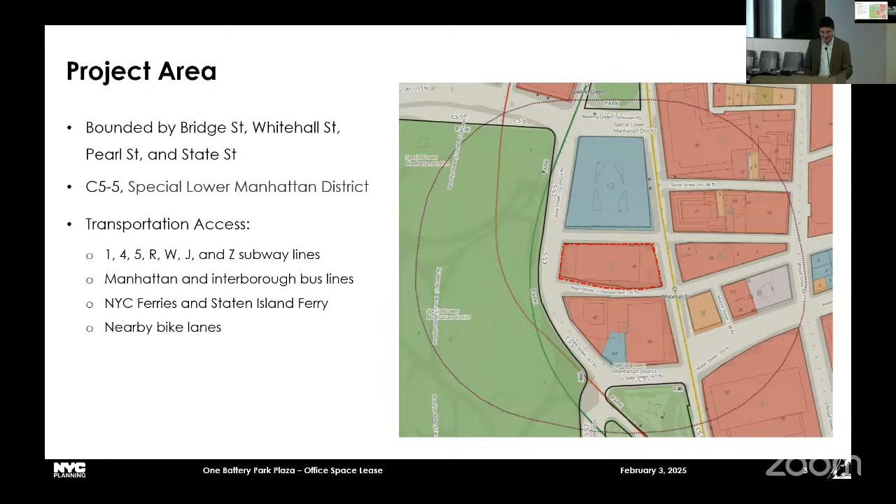IBO has been headquartered at 110 William Street, a privately owned building, since 1996. It currently occupies approximately 8,500 square feet on the 14th floor. Since the mid-1990s, IBO staff has doubled in size and has now approximately 51 full-time employees. As a result, IBO believes it has outgrown its current space.

IBO hopes to move into an approximately 18,800 square foot office on 1 Battery Park Plaza's 4th floor. It would be situated within a 35-story, nearly 900,000 square foot building that has entrances on Whitehall Street and State Street. The office space is large enough to accommodate IBO's full-time staff, interns, and research fellows, as well as its charter-mandated advisory committee meetings. The space would be renovated to provide ADA-compliant private offices, office cubicles, conference rooms, storage areas, a wellness room, pantry area, and restrooms. The downtown location of 1 Battery Park Plaza would also ensure that IBO would continue benefiting from proximity to other government offices, such as the Mayor's Office of Management and Budget.

And here are some pictures of the office that IBO hopes to occupy. In addition to being larger compared to IBO's current office, this space offers more natural light, improved ventilation, and opportunity for necessary technological upgrades.

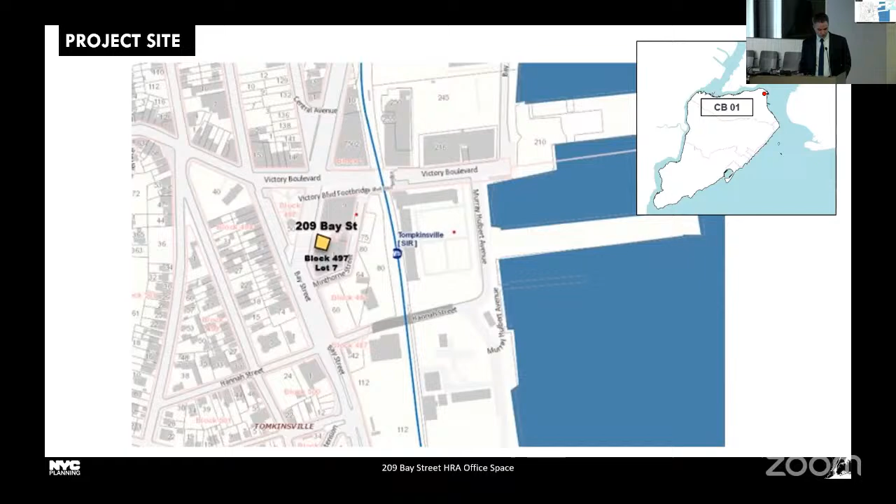Tompkinsville is a transportation-rich area, making it unique compared to most of Staten Island. The proposed site offers excellent access to public transportation, a core concern for the agency's programs that serve at-risk individuals. The site is just one block from the Tompkinsville station of the Staten Island Railroad, about 500 feet from the S78 bus route, and 0.1 miles from several other bus routes at the Montgomery Avenue, Victory Boulevard, and Bay Street stops. The proposed site is just 0.6 miles from the St. George Ferry Terminal.

The project site, Lot 7, is located in the Tompkinsville neighborhood within an R6 C2-4 zoning district. HRA's office space is located on the ground floor of the one-story building. The proposed site primarily consists of workstations along with operational and common spaces, including 12 desks, an orientation room, lobby, waiting area, pantry, and restrooms. There are approximately 12 employees who use the office space on a daily basis, contributing to the area's local economy and utilizing its mass transportation.

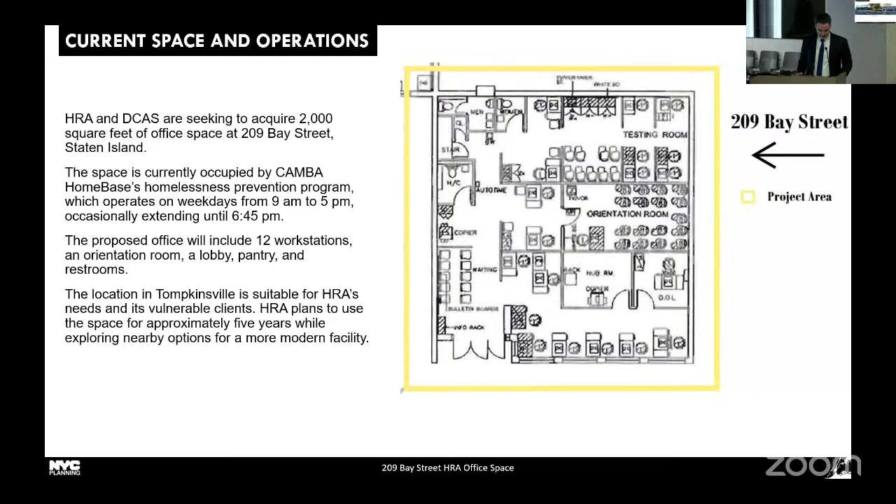CAMBA's homelessness prevention services, located on Lot 7, are in proximity to HRA's two other locations on the same block: 201 and 207 Bay Street, on the left, and 215 Bay Street, on the right. HRA programs at 201 Bay Street include the Benefits Access Center Richmond, Richmond SNAP Center, Fair Fares, Public Engagement Unit, Home Energy Assistance Program, and Investigation, Revenue, and Enforcement Administration. HRA's HIV and AIDS Services Administration operates at 207 Bay Street, while the Staten Island Medicaid Office, Adult Protective Services, and Domestic Violence Services operate at 215 Bay Street. Together, 201, 207, 209, and 215 Bay Street form a hub of HRA services for all of Staten Island. The proximity of these HRA entities allows for both operational and client service efficiencies for the agency.

The site office is shown on the left, and the applicant waiting area is shown on the right. The public accesses the space by scheduling an appointment via telephone or email, or through walk-ins during normal hours, Monday through Friday, 9 a.m. to 5 p.m. On occasion, the office will remain open until 6:45 p.m. on a weeknight. There are no fleet vehicles operating out of this location, and no parking is allocated to staff due to its transit-rich location.

The applicant states that they meet the four fair share criteria related to suitability of cost effectiveness, operational efficiency, consistency of location, and supporting the development of New York City's regional business districts. This concludes my presentation. The applicant team is scheduled to present at the public hearing on February 5th. Thank you, and I'm happy to answer any questions at this time.

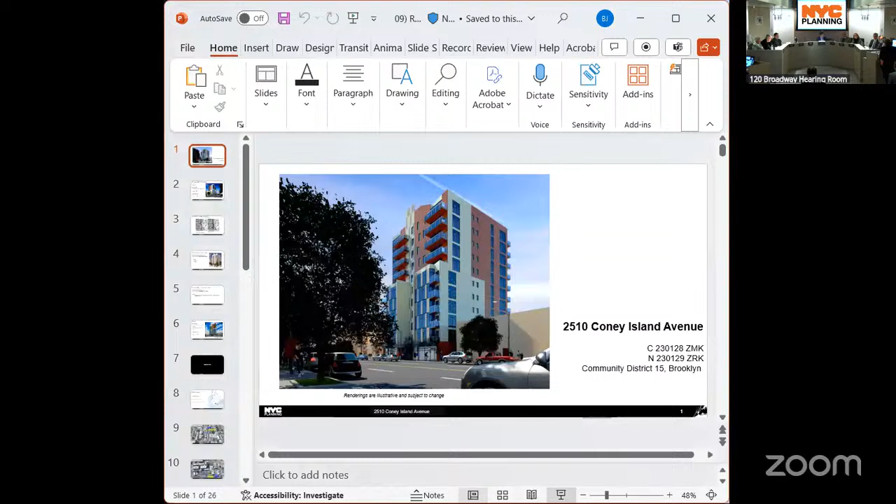So this is a pre-hearing follow-up for a private application from 2510 CIA LLC for a zoning map amendment from R4 and C81 districts to an R7D C24 district within the Special Ocean Parkway District, and a zoning text amendment to Appendix F to facilitate the development of a new 11-story mixed-use development, including over 61,000 square feet of residential space, or 60 dwelling units, 16 of which will be permanently income restricted, and over 6,000 square feet of ground floor commercial space. This application was certified on November 4th, 2024, and the public hearing is scheduled for this Wednesday, February 5th.

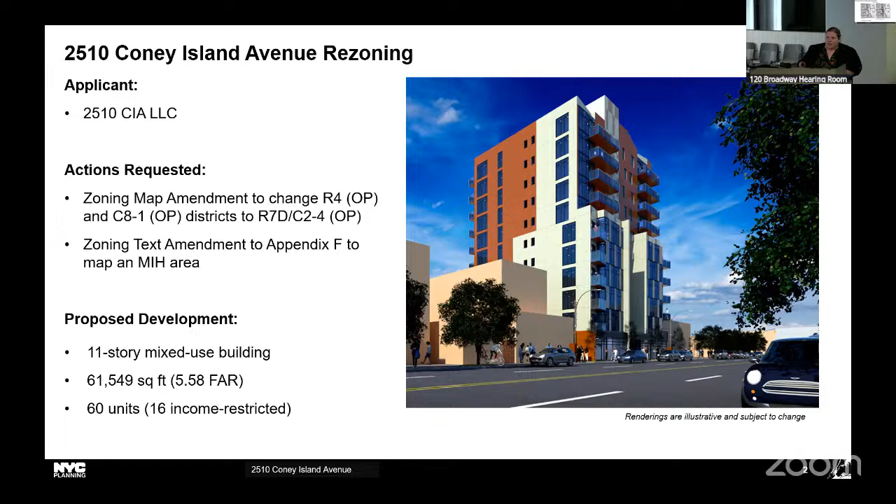The proposed actions include a zoning map amendment to change the existing R4 and C81 districts along Coney Island Avenue to an R7D C24 district, and a zoning text amendment to map MIH coterminous with the project area.

On December 17th, 2024, Community Board 15 held a public hearing, and with a vote of 3 in favor, 33 opposed, and 1 abstention, voted to disapprove this application. During the Community Board review period, the applicant modified the illustrative materials and reduced the height and unit count of the proposed building. The board, however, still had concerns that the proposed rezoning would negatively impact traffic and congestion on Coney Island Avenue.

The applicant has not filed a modified land use application with the department. On January 15th, the Brooklyn Borough President held a public hearing for this application and subsequently recommended to approve the application with one condition, that the applicant reduces the parking spaces to a maximum of 1 parking space per 2 dwelling units.

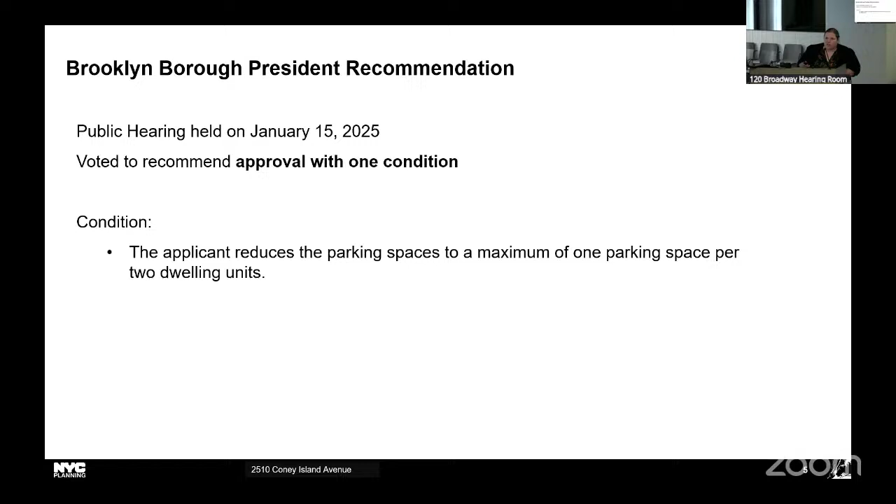In summary, this is a private application for a zoning map amendment from an R4 and C81 district within the Special Ocean Parkway District to an R7D C24 district, and a zoning text amendment to map MIH, and to facilitate the development of a new 11-story mixed-use building, including approximately 60 units, 16 of which would be permanently income restricted. Thank you, and I'm happy to take questions.

This plan and its related actions, known as AMUP, represent a major opportunity to re-envision a corridor in central Brooklyn to support housing and job growth, coupled with streetscape and infrastructure improvements, the culmination of over a decade of planning work and engagement.

As proposed, AMUP would create about 4,600 new homes, of which 1,440 would be income restricted, and over 800,000 square feet of space for businesses, totaling about 2,800 new jobs.

To facilitate this vision, we're proposing a set of zoning map amendments and zoning text amendments to map MIH and establish a special district to improve the public realm and foster a mix of uses. In addition, HPD and DCAS are co-applicants for several site-specific actions, including UDAAP designations, acquisition and disposition actions to facilitate additional housing at 5 sites.

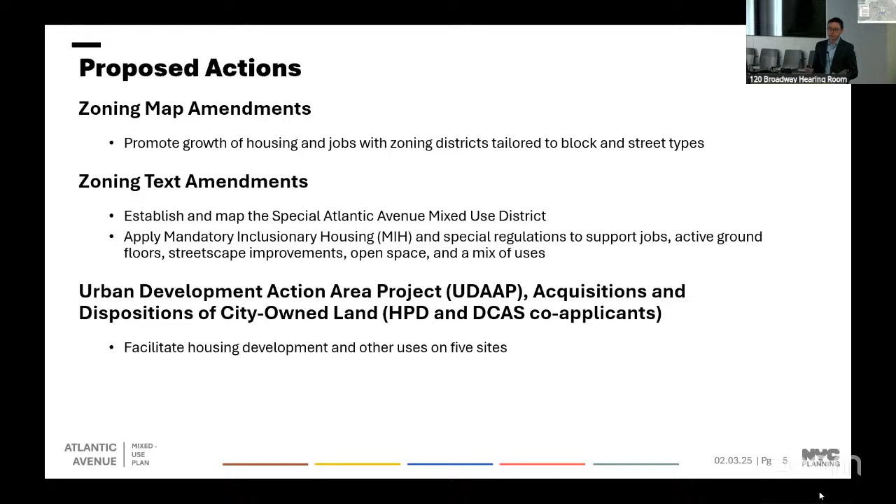AMUP covers about 21 blocks along Atlantic Avenue, split between Crown Heights and Prospect Heights in Community District 8 to the south, and Bedford-Stuyvesant in Community District 3 to the north. Now I'll pass it over to Jesse to recap our proposal.

Thank you, Jonah. Building on Community Board 8's M-CROWN process and the M-CROWN Community Vision Report, the plan introduces a new framework, opportunities for capital and programmatic investments, and an expanded project area to create more affordable housing opportunities beyond MIH.

Once again, to help achieve these goals, we're proposing zoning map changes, a special district to go beyond what the underlying zoning can achieve on its own, site-specific opportunities to unlock potential for public sites, and other opportunities in coordination with agency partners.

So specifically, the land use actions include a zoning map amendment, zoning text amendment, and an urban development action area known as UDAAP, acquisitions and dispositions of the city-owned land.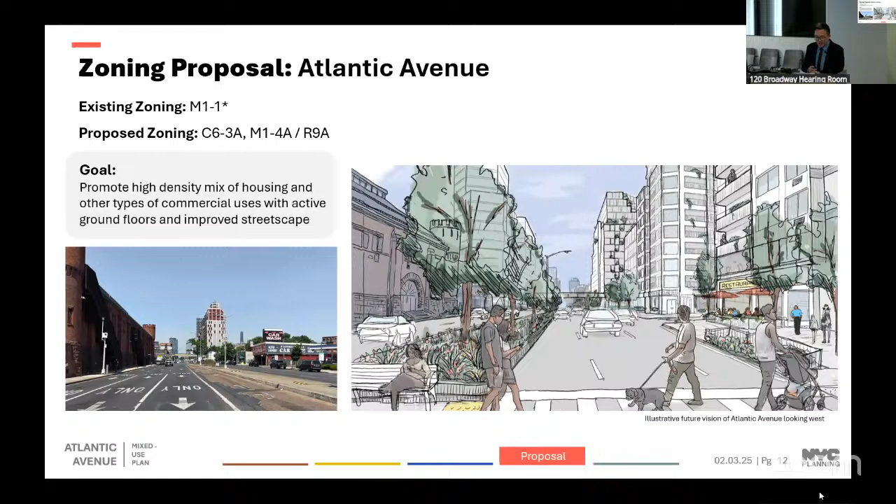The proposal is to extend C6-3A along the corridor between Vanderbilt and Nostrand and rezone 1 block from Classon Avenue to Franklin Avenue as M1-4A, R9A to support existing manufacturing with a mix of uses. Additionally, proposals include breaking up building facades along street walls, requiring active ground floor uses, and setting back street walls to improve the pedestrian experience.

Moving on to the next area, we have Grand, Classon, Franklin, and Bedford Avenues, which are all important connectors across Atlantic Avenue. Along these corridors, we seek to encourage mixed-use developments with active ground floor uses and with a height that steps down from Atlantic Avenue.

The M1-3A/R7D is proposed along Grand and Classon Avenues, shown in orange in the middle. The C4-5D is proposed along Bedford Avenue, extending the existing C4-5D mapped as part of the Bed-Stuy South rezoning back in 2007. In addition, we're mapping a C2-4 overlay in existing residential areas with non-conforming commercial, shown in dotted red at the bottom.

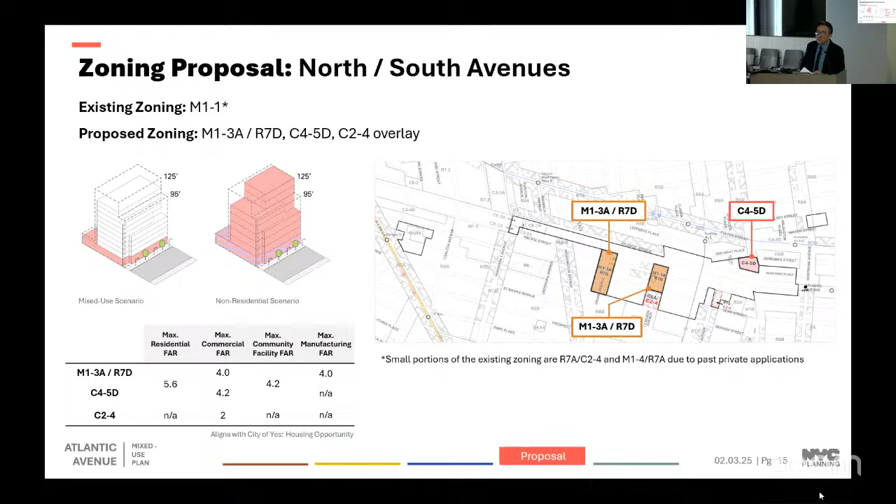Onto the third area, our mid-block areas, comprised mainly of areas south of Atlantic Avenue between Grand, Classon, and Franklin, as well as the section of Herkimer Place to the north. Here we're proposing a mix of uses and densities reflective of the side street context, while incentivizing mixed-use developments that support job growth.

To accomplish this, we're proposing to map a pairing of R6A and M1-2A districts in the mid-block south of Atlantic Avenue and the C4-3A along Bedford Place. To incentivize 1 to 2 floors of space for jobs, we propose an incentive of 1.1 FAR for all types of non-residential uses, which would be unlocked only for mixed-use buildings.

Moving on to the top right, where the orange sliver is of Herkimer Place, we're proposing to map M1-1A paired with R6B. Once again, to incentivize spaces for jobs, we propose to allow an increase of 0.6 FAR for a total of 3 FAR, and this is once again only for mixed-use developments.

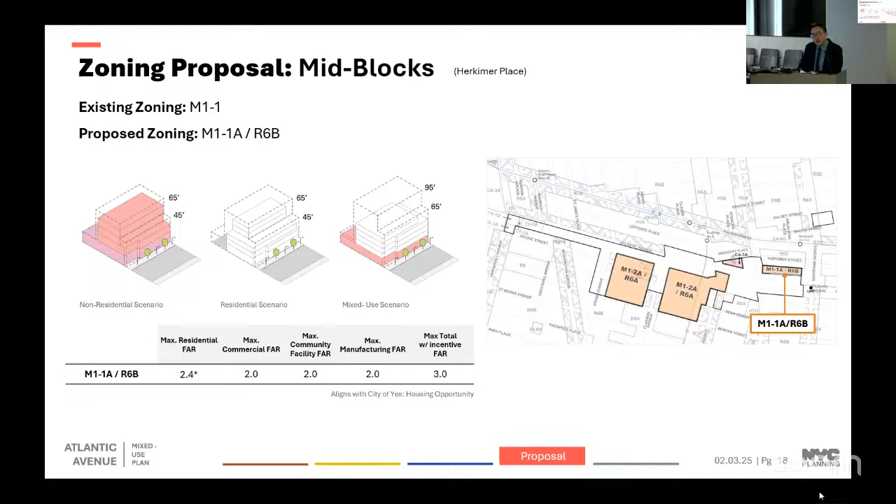The Bedford Atlantic Armory is a city-owned LPC landmark, currently partly used by the Department of Homeless Services as a men's shelter. Here we're proposing to map an M1-3A, with the short-term goal to bring the armory into compliance, and a long-term goal of exploring ways to reactivate this underutilized space.

Moving on to the residential areas, AMUP seeks to maximize affordable housing opportunities on city or non-profit owned sites. There is one to the south of the armory and two non-contiguous areas to the right and left.

As a first step to facilitating these opportunities, we're proposing to rezone these areas to R7D, R7-2, and R7A. I'll note that the two yellow areas on the left and right that are non-contiguous are not part of the Special Atlantic Avenue Mixed-Use District. Those proposed R7D and R7-2 zoning developments would now be as-of-right since City of Yes has been adopted. This adds, for the Commission's awareness, an extra 10 feet under R7D and a potential increase of 20 feet for R7-2, which is the location of the 457 Nostrand infill that will be subject to LPC review and a forthcoming RFP, which Jonah will talk more about later.

Moving on to special text amendments, the Special Atlantic Avenue Mixed-Use Special District would include rules for a lively streetscape along Atlantic Avenue and other corridors, and support a mix of uses, while MIH would also be mapped in all areas allowing residential. In addition, with the recent adoption of City of Yes for Housing Opportunity, this text amendment will also clean up some of the zoning text for AMUP.

As mentioned before, we're proposing a zoning incentive for mid-block job-generating uses with housing above. This text amendment also includes urban design measures to set back buildings to effectively create a wider sidewalk, mandate facade articulation on larger buildings, and also the first public space bonus expansion outside of Manhattan and central business districts.

Now focusing on more site-based proposals and investments that were announced at certification, and also to provide some updates, I'm going to hand the mic back to Jonah.

All right. So now we'll just spend a few slides recapping the additional income-restricted housing units that we're proposing in AMUP.

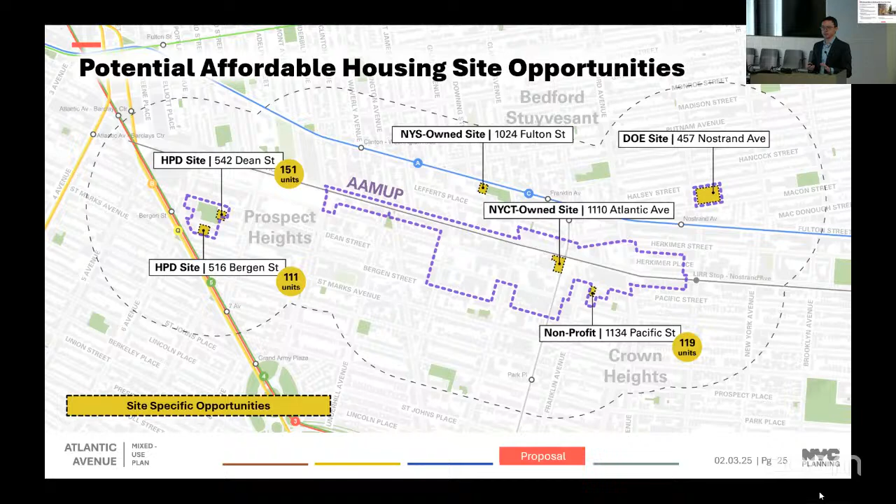So moving on to the proposal, as a reminder, at 542 Dean Street, we're seeking to develop 151 affordable homes for older New Yorkers earning up to 50% AMI, as well as provide on-site social services, a separate community facility space, and 6,500 square feet of new publicly accessible open space.

And then at 516 Bergen Street, we're seeking to facilitate the development of an 11-story mixed-use building with 111 affordable homes for families, with a majority of units up to 60% AMI and the remainder up to 80% AMI, based on the ELA term sheet. This proposal also includes a 5,000 square foot multi-purpose community center and 23 replacement parking spaces in the cellar for HPD to continue storing their inspection vehicles.

A UDAP action is proposed to facilitate both projects, this one and the Dean Street project. And then for the Bergen Street project, we're proposing an acquisition action in order to allow HPD to keep a portion of their vehicles in the cellar.

And then at 1134 Pacific Street, HPD is working with the developer and nonprofit Acacia Network to develop an 11-story mixed-use building with 119 affordable homes, which, as I just mentioned, will be part of the ELA program.

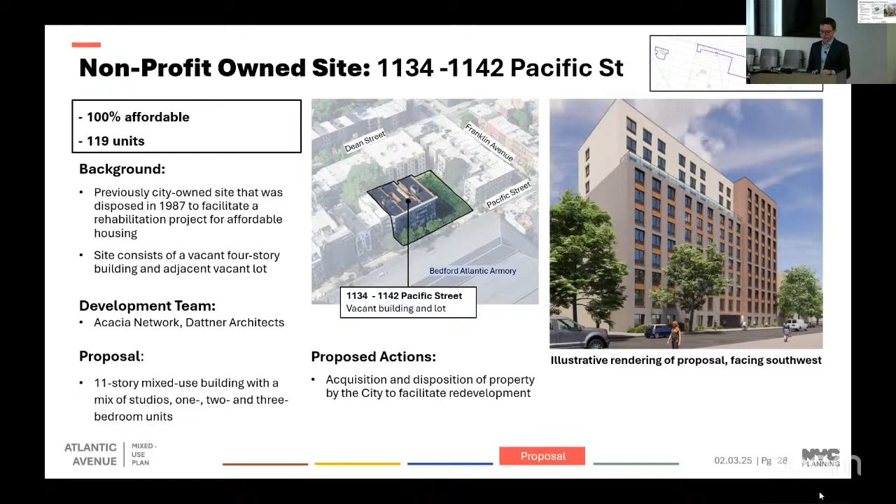At 1110 Atlantic Avenue, there is an approximately 26,000 square foot site owned by the city and leased by the New York City Transit Authority, used as a cable repair shop and storage. We're proposing an acquisition and disposition action here for the site in order to facilitate a future redevelopment, and discussions over the use of the site are still ongoing with City Hall and the MTA.

At 457 Nostrand Avenue, we're continuing to evaluate infill of up to 200 homes on a property owned by DOE that's used as an adult learning center and includes a large surface parking lot, where we're considering infill with affordable housing and possibly a school space on the ground floor. To facilitate this, we're proposing a disposition of city-owned property.

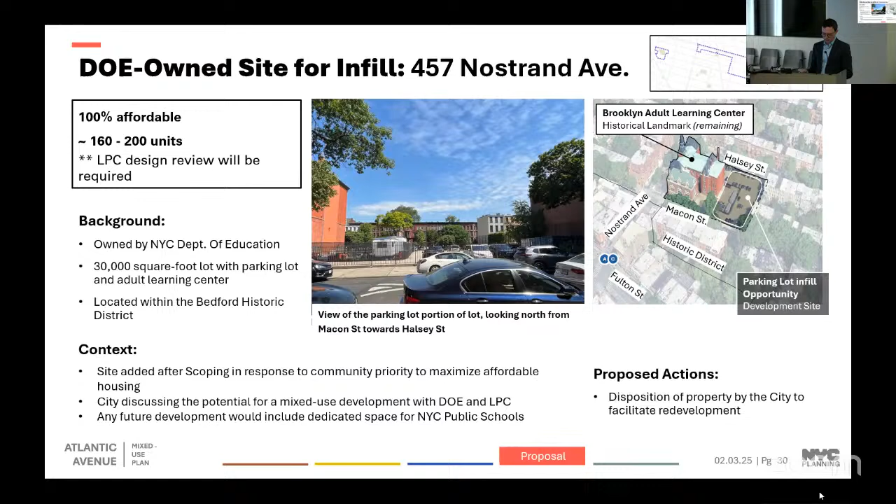As mentioned, at certification AIM-UP includes a few city-led programs and investments, while long-term investments in the public realm and infrastructure are still being considered. We wanted to highlight a few existing and ongoing investments, some of which are a direct response to outreach, and what we believe reflects a down payment on our commitment for a holistic plan. These projects include area-wide tenant workshops and other ongoing initiatives or outreach we've done, but also specific investments in streets, parks, and infrastructure.

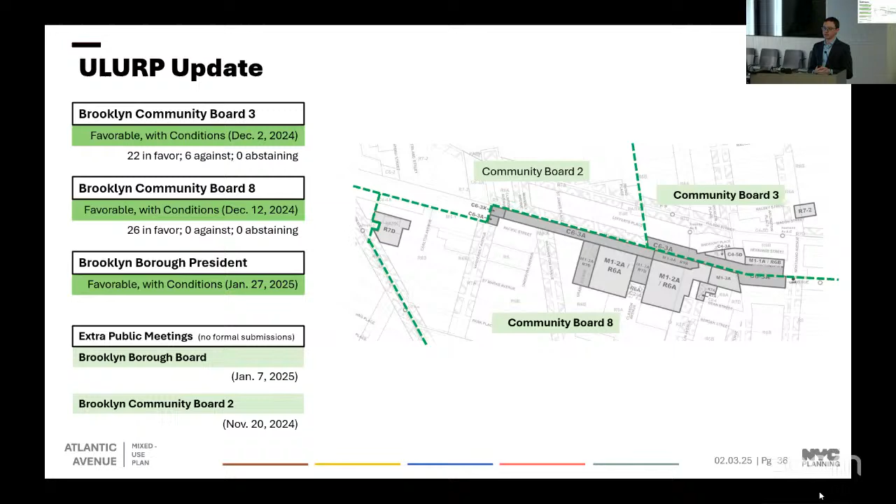Starting with Community Board 3, covering the portion north of Atlantic Avenue, the board held a public hearing and vote on December 2nd, voting 22 in favor, 6 against, and none abstaining to approve AIM-UP with conditions. These included conditions related to Atlantic Avenue, the 457 Nostrand Avenue DOE infill site, parks and open space, jobs, and infrastructure, as shown on the slide.

Next, for Community Board 8, covering the portion south of Atlantic, they held a public hearing and vote on December 12th, voting unanimously with 26 in favor, none against or abstaining, to approve AIM-UP with conditions, including conditions to promote specific types of non-residential uses, increase the amount and depth of affordable housing, fund legal services for tenants, and support tenants who have been previously displaced by giving them priority for new affordable housing.

Lastly, Community Board 8 included recommendations to improve sidewalks, streetscape, public transit, sustainability, and open space, along with a broader general condition to fund a facilitation consultant to oversee the city's investments.

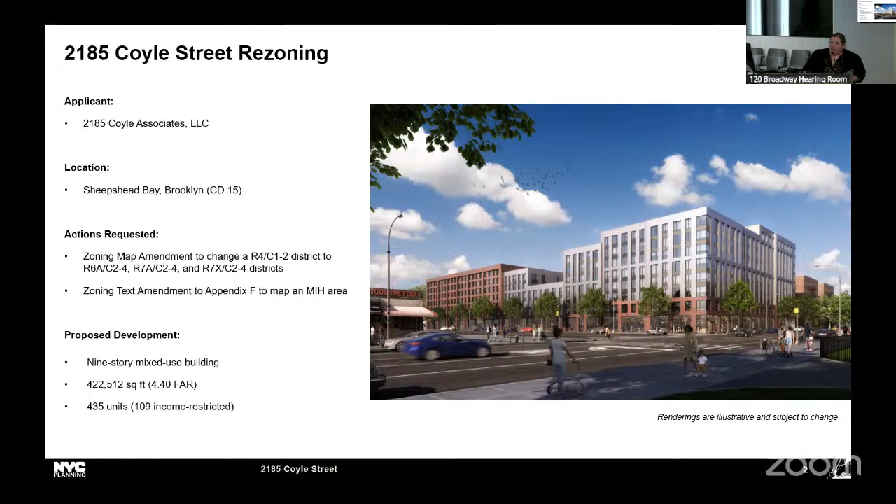Great, thank you. I'm sorry, can you just go back to the first recommendation? Sure.

Okay, so this is taking out a piece of the puzzle from what had previously been approved by the commission, is that right? So the project area stays the same, it's just a reduction. The CPC approved it split between R6A and R7A on the top of the lot, and the 100 feet facing Avenue V was R7X. So the R7X portion is going down to R7D, and the R6A portion is now taking over the entire lot instead of having the R6A split with the R7A.

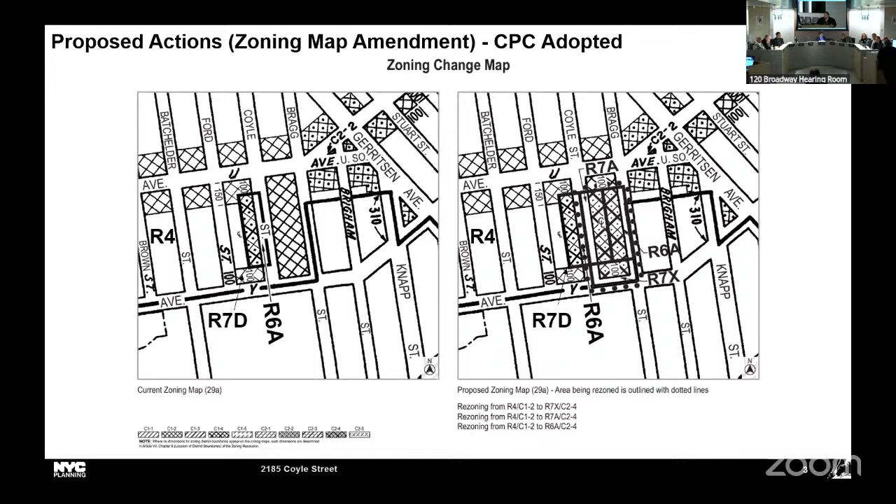Okay, thank you. Other questions? Department believes this is in-scope change, is that correct? Yes, it's in scope. All right, well, it's on us to make the official determination, so I will seek assent here by a voice vote to send a letter to the council that these modifications are in fact within scope. All those in favor, please say aye. Aye. Opposed, nay. Okay, we'll do it. Thank you, Lucia. That motion passes.

Okay, let's go to the next and last item for the day. The 12th item on our agenda is the City Council modification scope determination for 438 Concord Avenue rezoning. The City Council proposes to modify the zoning text amendment to Appendix F, removing MIH Option 2 and adding the deep affordability option, and staff believe this modification is within scope.

Any presentation on this one? No, but Caesar is available to answer questions. Any questions on this? Okay, again, I will seek assent here by a voice vote to send a letter to the council that these modifications are within scope. All those in favor, please say aye. Aye. Opposed, nay. Okay, thank you very much. The ayes have it. I will send that letter.

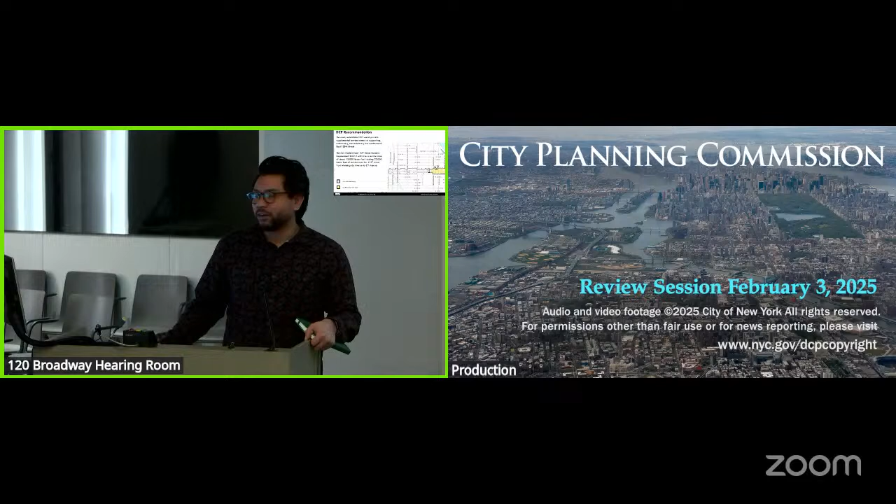Hi again, Commissioners. How are you? Good. The department presents the recommendation for the approval of the district plan of the Harlem BID.

We did provide a response from SBS to the commission. I don't know if you guys have additional questions, but in summary, our recommendation is for the approval of the proposed BID, considering that this will also add an additional 12,000 linear feet of business improvement district to the general 125th Street corridor. Great. Thank you very much. Excellent. Thank you, as always.

Thank you. Also, staff has prepared reports on 1093-1095 Jerome Avenue UDAP, 1460-1480 Sheridan Boulevard Waterfront, and New York Community Hospital of Brooklyn. Next, on 9525 Queens Boulevard, Tao is on Zoom to present.

Okay, thank you very much. Madam Secretary, just noting that is on the agenda for a vote on Wednesday, is that correct? Okay, because I didn't see it on the agenda here for the future votes list. I will just note that, if that is of relevance. But okay, 9525 Queens Boulevard, we have the department's recommendation of yes. Thank you very much. Great.